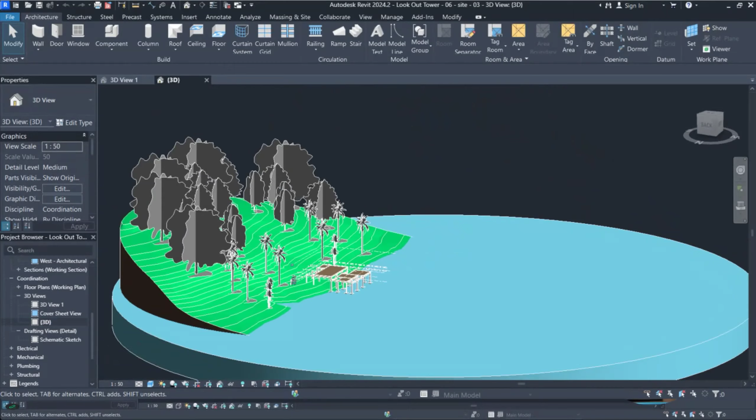In my case, it is like a lake, but it doesn't matter if it's a river or anything like that. I do have a 2-tiered foundation. I would suggest that you guys keep it simple. I tried to make this example complex, just in case anybody wanted to do it complex. Whatever you're doing should not be more complex than the one that I'm doing. Please, guys, let's keep it simple so that we can finish. So this is pretty much what you're submitting for checkpoint 2.

And the updated videos I have show how we created this, with some new features that Revit has that it didn't have at that time, and some new techniques. So I think it will be beneficial. All right, so let's check out creating the site for those of us who already have the site. And then if we have time, we'll go back to the model. Okay, so now that we have the base, we're going to create the terrain. And if we look at our original...

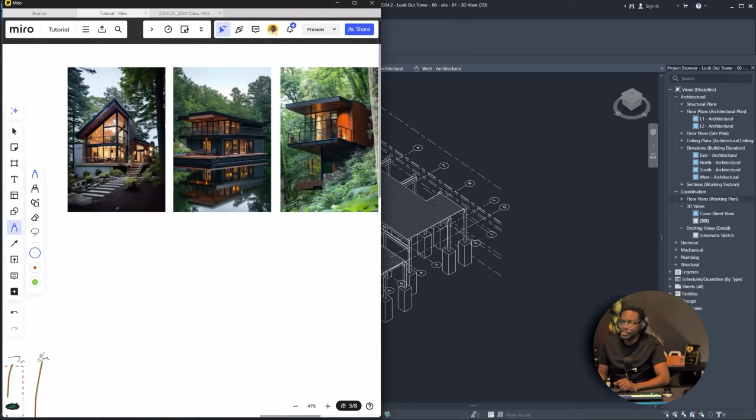So in order to create our terrain, we're going to go back to architectural, to the level 1 plan. Now to make this easier, we're going to switch. This is Revit 2024, so it has a dark mode. Because we're dealing with terrain, we're going to go to view and switch to light, because I think some of the colors will work a little bit better, right?

So the general idea, this is a section line, we're going to just put it down here. We have our land, which is something like this, and then we have these terrain lines, and it's basically sloping downwards to the water, and then we have the water that's here. That's basically what we're going to repeat here. The difference is we are going to do it a little bit more efficiently than in the sketch, but we're still going to reference our sketch.

So first thing we need to do, we need to grab the sketch that we had. That's this. I had saved it out into a file. So now I'm going to go to manage. I'm looking for links, right? Manage links. If I look on the images, I see where I have already inserted this link, right? So we did have this link here. And we're going to choose OK.

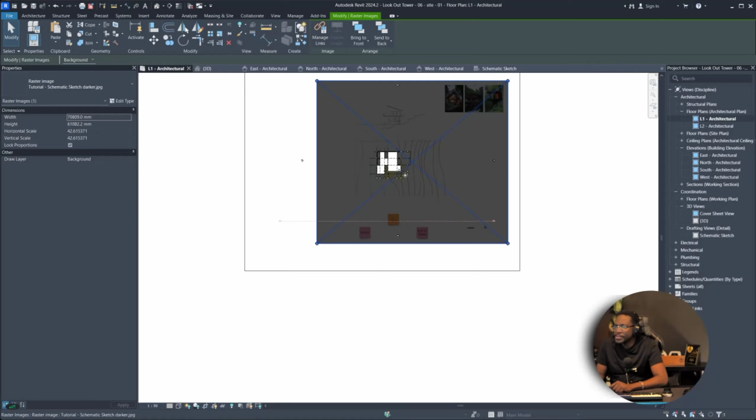We can go back to our schematic sketch. Here we had this, and we're going to copy this over to floor plan and paste it in here. Notice when we paste it, it's pretty big. We are going to make it a little smaller, and the most important thing is that we need to know what these levels are, and we also need to scale it. In our case, I don't think this drawing was to scale anyway, so we will take these contours with a grain of salt, so to speak.

So if I put it like here, it's round about there where I had the water kind of going in here, right? Now, if my contours were very specific, I could actually trace this view here. So that's what I'm going to do. I'm going to extend my page boundaries, or if I want, I can just disable it and turn it off, right?

All right, first thing, we don't want to have a square land, because that's going to affect our 3D views, because the world doesn't end right here. So what we're going to have is more of a rounded base, and make it a little bit bigger, so when we're doing 3D views, it won't look so weird. To do this, we're going to head over to Massing and Site, go to TopoSolid, and insert using a circular tool.

But before we do that, we're going to go on the right level. According to this, we wanted the land to be at around 0 here. Now, this is a sketch, so it may not have been very practical for some of the elements, but one thing that we want to keep in mind is the slope. We do have 1 meter slopes happening. So, those of you that did the terrain, right?

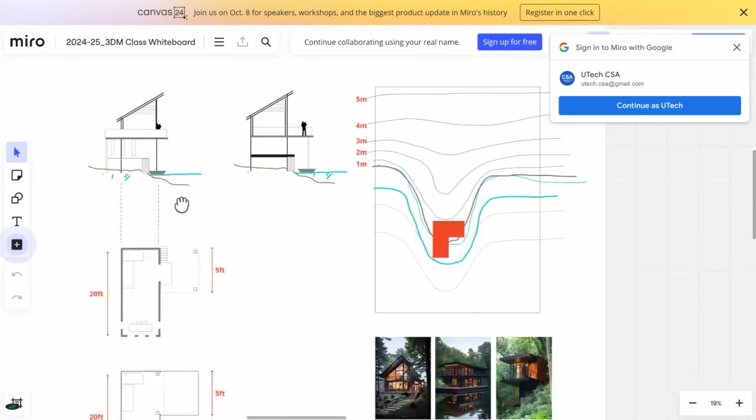What you should do now, you should have your terrain drawing. Let me go back to the website here, to the class Miro board. So if you notice, this was the initial sketch that I did. Notice that there are terrain lines and the terrain lines have numbers. This is going to be important when you're doing the site, because these are the numbers that you're going to plug into the program in order to get the slope.

All right, guys. Are you here? Yes, sir. All right. Or at least you're half here.

All right, let's proceed. So we would set our topo solid to be below the ground floor. So perhaps we will do waterline. If you remember from our original sketch, we determined that we want to have a waterline that is below the top of foundation, right? So that's what we're going to do. We have the waterline level and we want to draw the initial solid on the waterline level, the topo solid, which is the topography.

Now we're using the circle tool because we want to draw something like this, and let's see if we can move it to the center. Now we make it a little bit bigger, and we don't have these hard corners, which would look kind of weird when you render a view and it looks like the hill just ends at a weird corner. So we're not going to have that. All right, now we're going to choose OK, and then we have our base that looks like that.

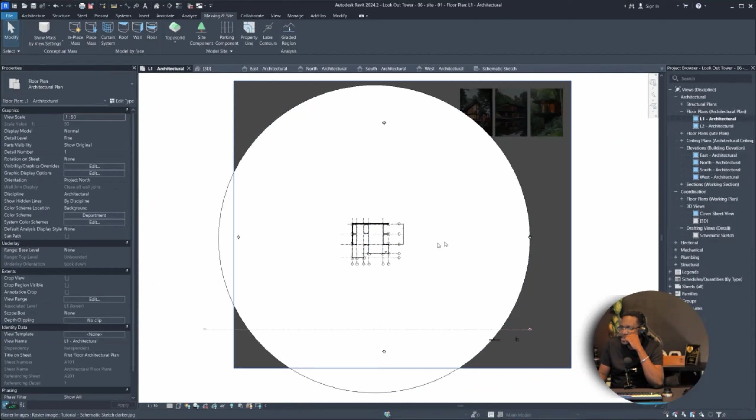Now what we need to do is insert the contour lines. It's a little tricky because we can't see the contours, but we could go to wireframe, and that will allow us to see these contour lines here. Now the general idea is that we want to trace these contour lines, but we also want to extend them to the edge of the circle. The more important thing is we want to keep the levels.

So what we need to do is click on the topo solid, and then we're going to choose add points. Now when we add points, we're simply adding a contour line to our drawing.

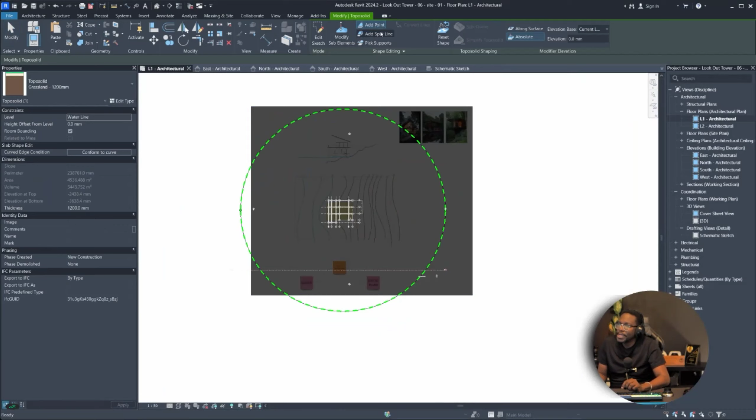So to create these contour lines, we're going to look at these levels closely and trace them based on these levels. However, we're going to extend the lines all the way to our circular boundary. To do that, we're going to go to massing and site - well, we already have the massing, so we're just going to click on it and choose add points. These points here are equivalent to the actual heights of each contour.

So what we're going to do is make sure we choose absolute, because we want the points to change height based off of a fixed location. That fixed location we're going to make the current level. So the current level, we are at waterline - it's kind of like saying this is the water level. And every level we do is going to be based on referencing that water level, so it's going to be above or below the water level.

Let me show you this. In this example here, this was the final version of my initial sketch. The idea is that I had two different levels for my ground floor, and my upper floor is just on one level. So you can kind of see where we went from this initial quick sketch to a more refined sketch here.

Now, can you guys see these lines here clearly on your screen? All of these dash lines. Yes, sir.

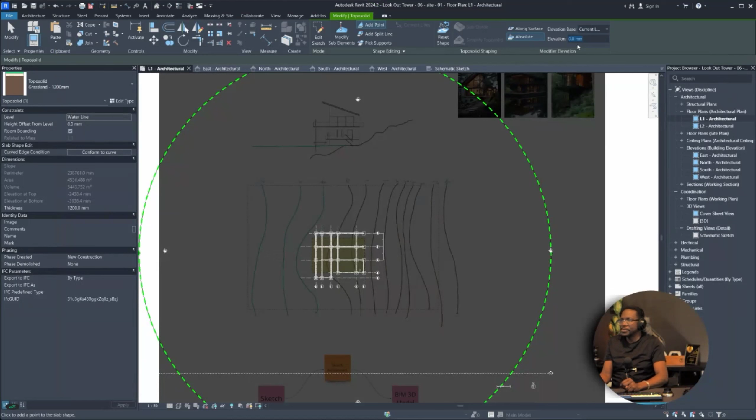All right, make sure you choose current level here, and make sure we're going to choose a different height. So the first thing we're going to choose is 1 meter, so 1,000 millimeters, and then we're going to trace this off that 1,000 millimeter line.

Now, as we trace these points here, a good rule of thumb is to try to make them as even as possible. It doesn't have to be super precise. Remember that a terrain is organic, so it's supposed to be a little messy.

Now, when it goes beyond where you have sketched, you're just going to make this up, and go all the way to the edge here. And we're going to continue this side. It doesn't matter if you stop here and then continue there. It doesn't matter. So we are going to continue this.

Oops, I think my height wasn't set, so I'm going to set that back to 1,000. Now, if you get any messages while you're drawing this, just choose OK and ignore it, because you can see these lines being generated. And if I bring up my 3D view, you can see where you're starting to get some heights, which might look a little funny now, but as we go, we'll see the difference. So I'm going to leave this view here and dock it to the right, and we're going to continue.

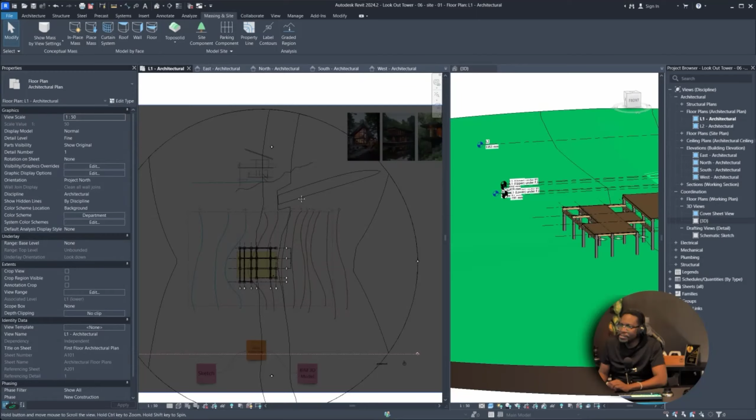So that could look good on 3D views. Exactly, because when we generate the views, it's going to look weird if your world just comes to a sharp angle and ends, right? And remember, we did have some reference views, so we want to try and get some beautiful images.

Did anybody else take any reference images or any kind of inspiration images based on their design? Anybody? Anybody? Anybody? Nobody looked up any pictures?

So, probably you guys are already advanced with the model already. But I want you to also see if you can find, just use Pinterest, Google, whatever, right? See if you can find something that is similar to what you are creating, something simple.

Like some parts of this are not simple, but some parts are. But the reason for this reference is when we come to create the rendered images, we're going to come back to these images. I didn't ask you to submit a reference image because this is something that is to your benefit. But when I started my sketch, I started from getting a reference image and then created a simple version here. As I said, these images will come back when it's time to render, to make your rendering life a bit more streamlined.

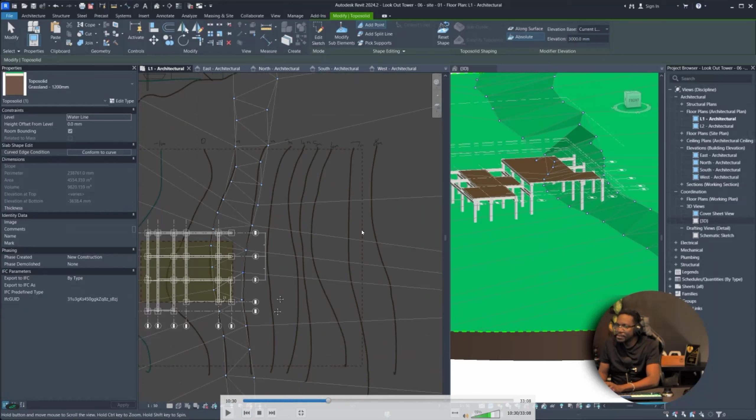And we're going to do the same thing now with 3000. So by the way, guys, I want you to keep in mind that the reason why I'm suggesting we work on this during class is, I'm telling you, when you're doing it on your own, you can't ask a video recording questions. So there will be stuff that starts to go wrong.

Like, I don't know, you're trying to draw the contour lines and it's giving you error messages and it's just not working out. There are actual things that will happen while you're creating the model. And if I'm not around, or somebody who knows the program or at least knows the section that you're doing, you're going to find that you're hitting some roadblocks.

All right, guys, so even if you're not able to do this drawing now, see if you can ask some questions that you think you'll have problems with, which will not be as potent or as viable as if you were actually working on a project.

Because I'm telling you, I don't know if you guys have ever done a tutorial. Everything in the tutorial video is fine, but when you press the exact same button, it doesn't do that for you. And that is what we want to solve while we're in class.

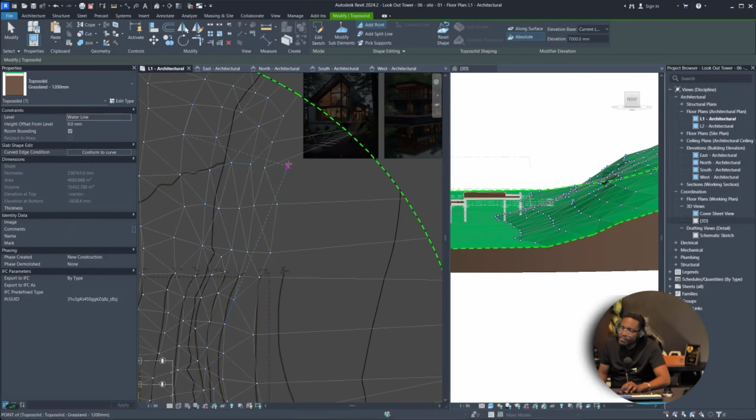Does anybody have any of your housing project? Are there any slopes, by the way, that you're doing for studio? Or is it all flat land?

Sir, we haven't started yet. The sites are flat, but we haven't started the assignment yet. We're still doing the site analysis presentations. This final presentation is a final site analysis on Friday. Yeah, I figure. But I was just wondering, so everybody has flat land basically, so no one has to really worry about terrain. Is there anybody incorporating any kind of levels in there?

Well, actually, you don't know yet because you're only dealing with... right, when I reach the design. Exactly. And if the land is flat, then chances are you don't have to worry about different levels.

So that is one of the things that we also cover in 3D modeling as well. Now, this terrain is fairly simple, so maybe you're not dealing with a terrain for this project, maybe for your next one. But this is just a feature that you need to know how to use, most definitely.

Next year in BIM, we're going to be using terrain as well when we're doing computing in BIM. So it will be kind of like a refresher, but a bit more complex than this, because this is just a simple little slope based on a sketch.

All right, now I want to show you something in just a bit. I'm going to just do another one here. Oops, yes, this is 10. Oh no, this is 1,000. So I'm gonna put 10. There we go. That always catches me. Point.

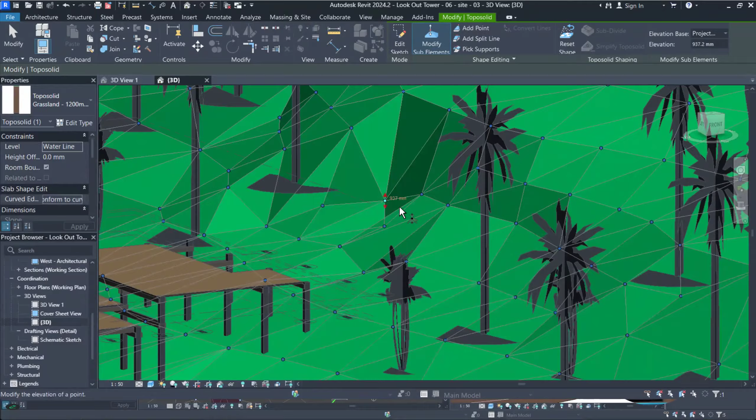So if I wanted this area here to be flat behind where the deck is, I can just go in and modify these areas like that. And I know that it looks rough, but we're gonna smooth it up before we render. So those are just some other general tips.

Some of you may have flat areas for your model. So all that means is that when you draw these contour lines, some of them will have the same elevations. But for me, each one of these dots here have a different elevation, so everything here has a higher elevation than here.

Now, guess what? You still will use the terrain tool even if you are drawing on a flat piece of land. So for example, when you finish your site analysis and then you need to do things where you show your roadway, parking, all that kind of stuff, the proper way to model is to use the terrain, the topo tool. It's just that now your topo is completely flat.

All right guys, so I don't want to see anybody using a floor slab for their studio model, right? One thing with Revit, it kind of forces you to use the right tool for the job. So if you're doing a terrain, then use a terrain tool. If you're doing a floor slab, use a floor slab. And if you're doing a roof, you do a roof.

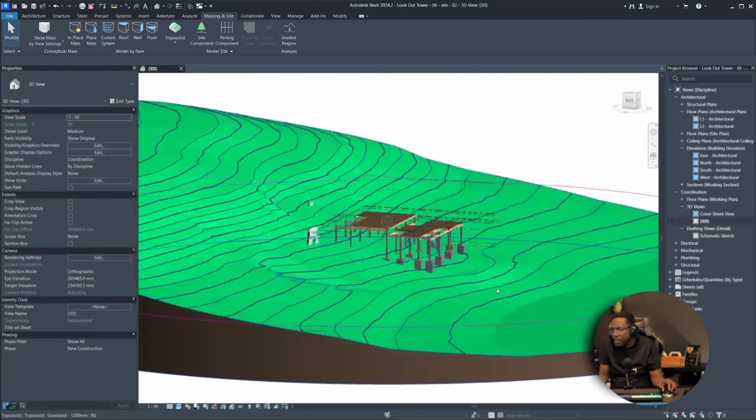Okay, so now that we have the site, we do need to add a few more elements. For reference, we are going to be adding some trees and a water body. So we're going to add the water body out here. First thing, let's add the water body.

Now to do that, we can go to our floor plan and hide this element here. If you notice, when you look at the site element, you notice that it's cut here, and the reason it's done that is because this is where our cut plane is. If we look at the side view, maybe this side would be better. You can see that we do have our level, and then we have a cut plane, so it is cutting the terrain as well. Now, that doesn't necessarily matter for us, but in terms of doing construction drawings, you would want to adjust your view range so that you're able to see the full terrain for your site plan.

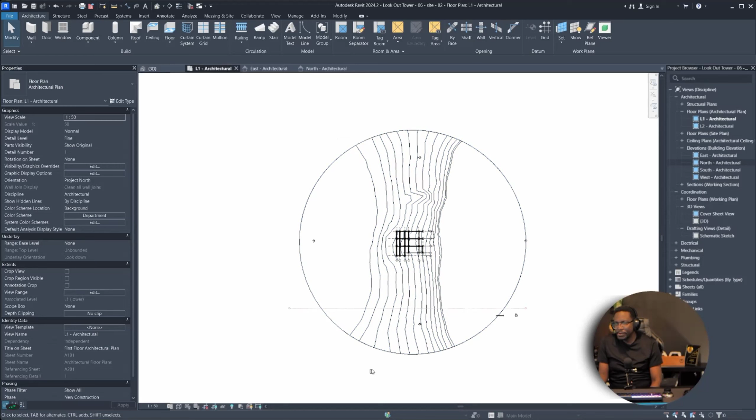So for that, we're going to go to model in place. We're going to choose model in place, and we can model under these categories. I don't think water is a category, so we're just going to choose generic model and choose OK. We're going to name this water level, we're going to call this water object or something like that, or water surface. All right, and now this is going to change up here to some modeling tools.

For example, we can extrude and do these modeling functions. For what we're going to do, we just need to do an extrusion, that's pretty straightforward, so we're going to click extrude. What I'm suggesting is the water is going to go a bit inside the terrain, but I would want the water to be a little bit wider than the terrain. So what I'm going to do is use the circle tool. I will set the levels after we draw this. Let me go and set my work plane, and I'm going to set it to be waterline. Right, so now I'm going to draw a circle.

Kind of like that. And this circle, I think I'm going to move it down, maybe like about that. So this becomes my water, because this part of the water is going to be pretty much inside the land. So this is fine. In terms of my extruded height, I can click this here. I'm going to choose OK.

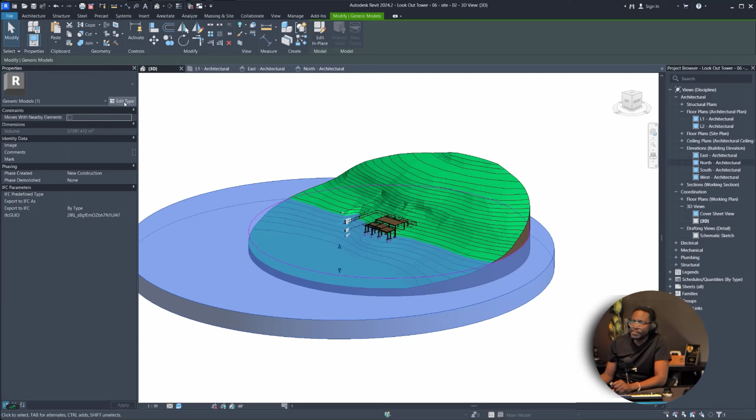Now we're inside the model. Inside the model, we can change things like the height and the shape and all of this stuff and the material. So we're going to make sure we're under modify. We're going to go here to the materials tab and we're going to find water and we're just going to click the surface here, and we could actually just click the side as well and the bottom. So this whole thing is just water. And we choose done. Then we choose OK. All right. So now we have water level that's there.

Now remember, we are going to go ahead and render these views. So we're not going to worry too much about the water material and these things. We just need it to be represented here. All right. Now the next thing we want to do is we need to add maybe some trees. To do that, we're going to need to import those families. So we need to go to insert and then load family. And we are going to look under the same US category and then we're going to look for site.

And under site, we see a few things here. No, actually not site. We're going to look for plant or planting, right? And these are actually family groups. So we can choose tropical and open that. Then when we go to architectural, that comes under the component category. So we can go to add component. And here we go. The good thing is that this is 6 feet tall, but if you click this, there are different types of tropical plants. For example, we have a hurricane palm that's 12. And all you need to do is just stick them randomly.

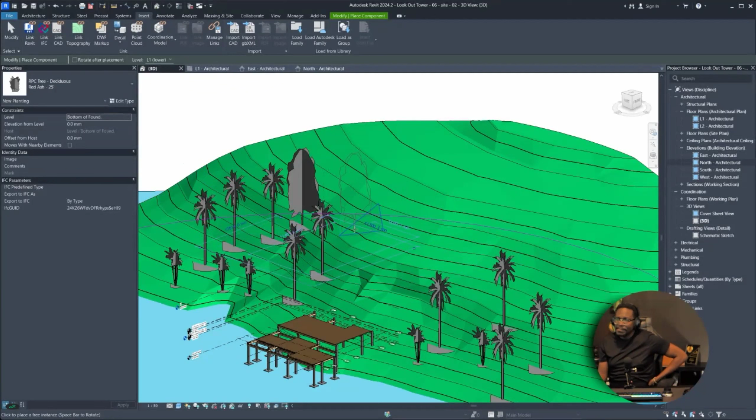Yeah. Now, you might notice that these trees look a little weird because they're like flat. And that's because it's using a type of, let's call it a tree plugin, that's called RPC trees. I'm going to just mix it up a little bit. So I'm going to choose this other one here. It looks plain in the viewport, but when it renders, it looks like an actual tree. Now, we're not too worried about that because we are not going to be rendering in Revit anyway. But we're still going to place these objects, which will make rendering in other programs much easier.

All right, so we're going to save this. And for good measure, we are going to create a new 3D view. We're going to create a camera view that will give us a perspective shot so we can kind of see how everything is looking. So we're going to go to view.

And then we're going to go under 3D view. We're going to go to camera. And how this works is you click and drag, and it's going to create a view. So I'm going to drag all the way like that and release. I'm going to set an angle.

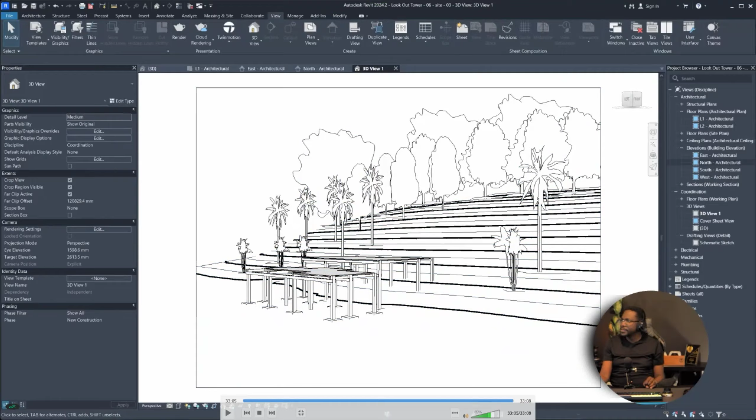All right. So the idea is, I did modify my version of the drawing. If you remember when I did this, I changed it slightly, made some adjustments, but it's pretty much the same. So I will also post that video as well in case you want, even though we've gone past that checkpoint already, but I'll still eventually post it. Because normally when I do stuff, I just record it anyway.

Okay, guys, so that is for the terrain. Now, as promised, those of you who haven't done the foundation yet, I do have some tips on how you can do that. So let's see if we can take a look on that now. Okay. All right. Now, what we're going to do is we're going to start to map out our 3D drawing. And in order to get that done, the first thing we want to consider is to structure our levels, right?

Now, for those of you who managed to look on the one that I sent last week, that last video, it's going to have some similar things. This is what the updated sketch kind of looked like. And I can show you a bigger view of that actually. Actually, it is in Revit. Here we go. And it is under schematic sketch. Right. So this was my side elevation.

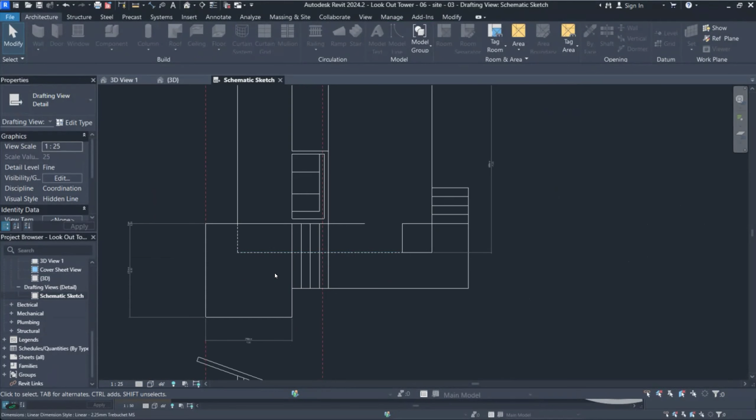So I just ended up having 2 levels. And this was my plan. So I do have 2 levels in the plan. So when you walk up here, you enter through here, and this is that kind of upper level. And then you kind of step down to this lower level here, and you can come out onto this little mini deck that is here. So I purposely made it a little bit complex, just because for those of you who may have a level in your drawing, at least you have something that you can use as a reference. But I would suggest that you keep it as simple as possible. All right. Okay, let's continue.

Usually when we're starting a 3D model, we want to get organized with our levels or our grids. So levels basically tell us what... So for example, with the drawing that we have here, this could be considered our ground level, or at least our, let's just call it lower ground level. But here we have another level, which is kind of like the upper ground level, because this entire area here is pretty much our ground floor. So these are 2 levels that exist within our ground floor actually.

So here is where we'll have our second floor or our first floor, depending on what region you're from, right? So these are all just different levels. Now, we also have a level for the water that's here. And what we can do is try to give them some labels. So I'll put W for water level. And I'm going to call this level 1A and level 1B. And then this now would be level 2.

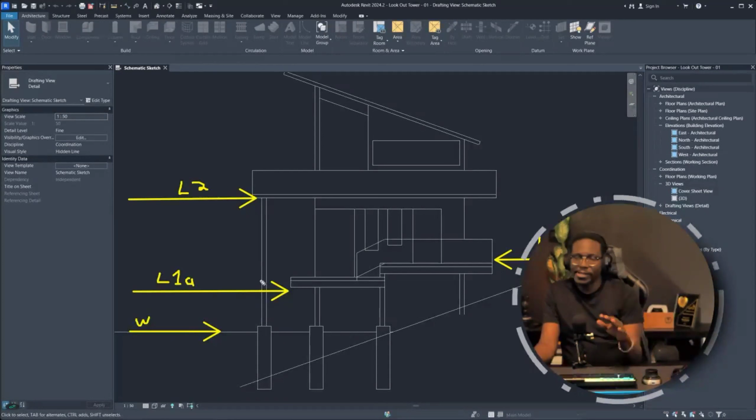So all of these are different levels, and think of them as reference points. And we're going to set up these levels first. Before we start to model anything, we're going to start to define what these levels are. Okay, let's go ahead.

Okay, now what we're going to do is, in order to determine levels, we need to be in an elevation view. So if we look over here at our project views, we're going to look for elevation, and I'm just going to pick a random elevation. Okay, so this kind of represents our elevation. And we already have two levels starting with level 1 and level 2.

Now what we're going to do is have the levels as a reference here. So I'm going to go back to our sketch that's here, and I'm going to take a snip that's there, and we're going to put that on our Miro board.

There we go. So we're going to put that here, and we're going to have our drawing here. All right, so that's our drawing here. So we're going to paste that here. All right, so now we can kind of get organized with the levels. So let's go on the east elevation view, and what I'm going to do is make these a little smaller so that we can see more of the drawing here.

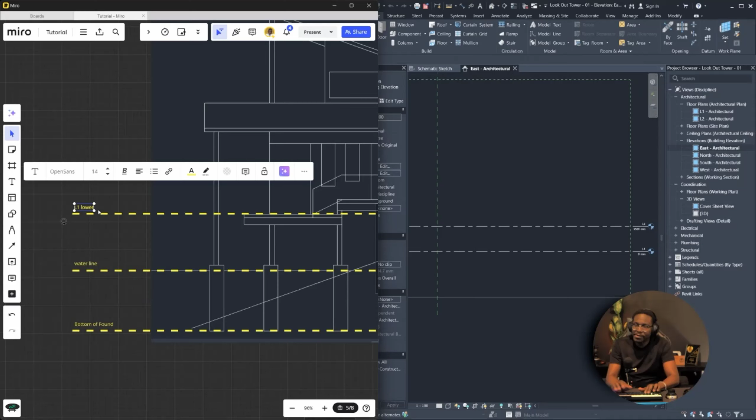Then I think we're going to have a level here, and we're going to say this is the bottom of foundation. Then we are going to have another one here, and we're going to call this level 1 lower, and we're going to have another one here, and then we're going to call this level 1 upper. So we'll have lower and we'll have upper here. So lower is this deck and the upper will be that deck.

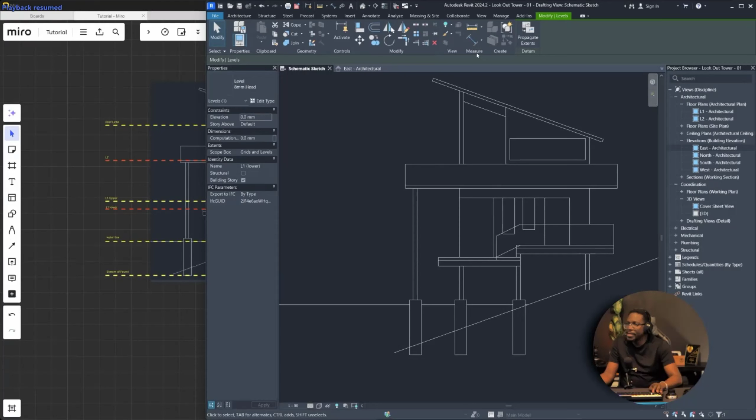All right. So that's why you see me using so many levels here, because you want to divide up your building using levels and grids as much as possible. All right, let's continue. So now remember that these heights may not be exactly accurate, but it's a good start. So for example, this is saying that it's 11.5 feet. I could maybe just round that off to 11 feet and then, when I click on level 2, I can just say let that be 11 feet, right?

So that's now 11 feet. Now, if I can take a dimension and I can put there, and there we go. So we know that that is 11 feet. Now, notice there are some other lines that you see here, right? Remember, this is an elevation view.

So firstly, we have this line here. That is our scope box. So pretty much all our annotations and everything for the drawing will be in this. Then we have this here, which is going to be our, let's just say, our boundaries. So any line or any model that exists beyond this point, we won't see it. This is just a kind of a reference line that we can use.

So we're not going to use this right now, so we're just going to remove that. And actually, if you can see here, this is a section that is here by default, and we're just going to leave that for now. All right. Now, so far, we have created these 2 levels. So this is pretty much the height of one floor that we have here. Let's create some of these other levels.

Now, keep in mind that in order to create a level, we must be on the architecture tab. That's here. And if we head over on this side under datum, we see where we have levels and grids. So if you remember, I told you earlier that usually the first thing you do when you're setting up a drawing, you're either doing levels and grids, or at least one of them, because these 2 elements form the foundation of whatever you are creating.

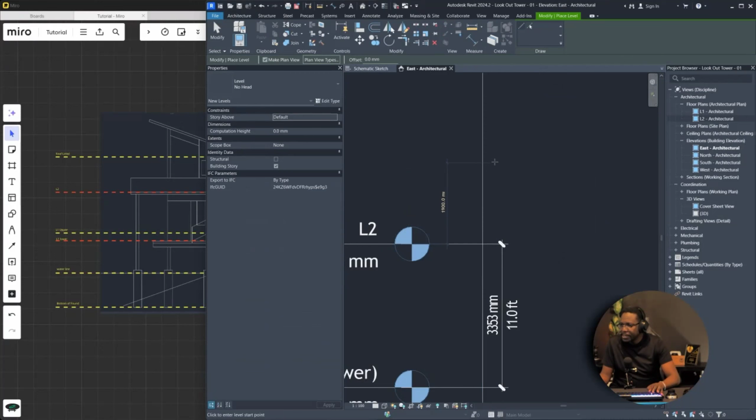So let's create a level. So if I click on level here, this is asking me if I want to save the project. So I'm just going to say, yes, I want to save. All right. So now notice I'm in an elevation view and I'm creating a level, and you can see it's asking me to start to draw a level, and a level is a line with 2 points. So for example, I can say start here and end here.

Now, when I draw this first level, notice a few things. Firstly, there is a new plan called L4, and it is attached to this level that I just drew. Now, this level is the same thing like this level here, but notice that it doesn't have this symbol at the end, right? So let's see why. When we finish drawing the level, I'm going to hit escape here. And remember how Revit works. I can click on the level and I can see the properties for that level.

So let me make this full screen for now. All right, there we go. Now these are the properties of that level, and I can go to the main properties here. And if I click on this, it will show me some different types, some different family variations for this family that's called a level. So every object in Revit is pretty much a family, and within that family you can have different variations, right? So this particular level family is one that has no head.

So I can change it to one that has an 8mm head symbol on both ends like that, or I can change it to this one that has it on one side. So this is the same family type as these other levels here, because you can see they have the head on one side and not the other side. So that is why this looks so different.

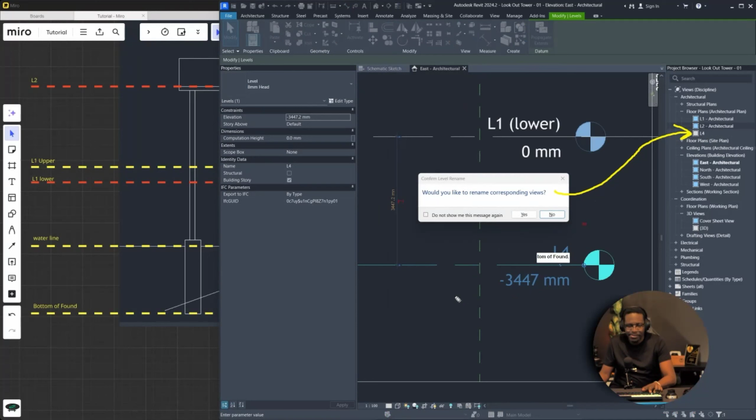So I'm going to rename this, but I'm also going to delete the bottom of foundation level, because I don't want a plan for that. All I want is a plan for my lower ground level and my upper floor plan. These other levels are just going to be references to help me model—they're not actually going to be plans.

So to avoid confusion, I'm going to change this to no head, which will help me define that these are my main two levels and these are not. Though if I do that, I'll also lose the label, but we can customize what these look like at a later time.

For right now, let's create the rest of the foundation. We also need a waterline foundation, so I'm going to click and copy this. I'll go to the ribbon, go to copy, and go to paste, and now we have our waterline.

I can always refer back to my sketch to get a rough idea of how far these are. For example, I can click here and go to my dimensions, using the little shortcut menu. I see that the top of the foundation is about 7 feet, and the top of the waterline is about 7.9 feet—I'll say it's about 8 feet.

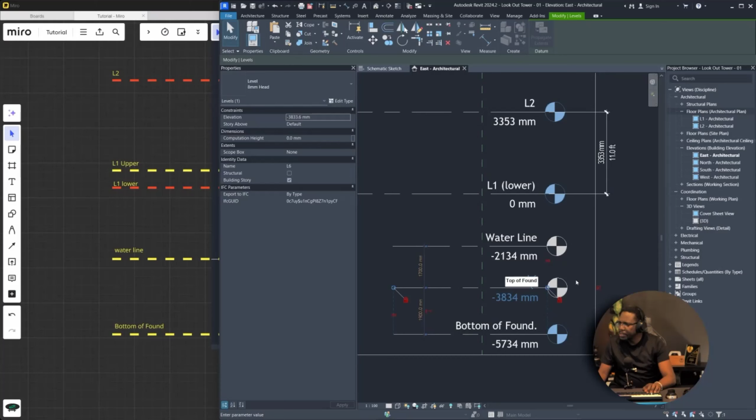So: top of foundation, bottom of foundation, and the top of the foundation was about 7 feet from the lower part here. I'm going to move this dimension up here and make this 7 feet. Now I have these two dimensions over each other.

What I can do is press tab to switch to another object whenever they're both above each other. And this one was about 8 feet—I mean, minus 8 feet.

All right, so let's make this a little neater. I'm going to grab this right at the neck here and move it so that it's somewhat in alignment. There we go. So we have our waterline, bottom of foundation, top of foundation, and our upper floor.

We also need to have our level 1 upper. So I'm going to copy this and paste it above. Oh, it's actually pasting from here, so I'll just paste it there first. Notice that when I paste it, I didn't put in the height for it.

That's because in Revit, the concept is: copy it, put it down on the sheet or in a virtual space, and then revise it. The 'rev' is revise and the 'it' is it—revise it. That's the concept of how you use Revit: you draw it, then you revise it. Just draw it on the sheet, doesn't matter if it's bigger or smaller, then you revise it.

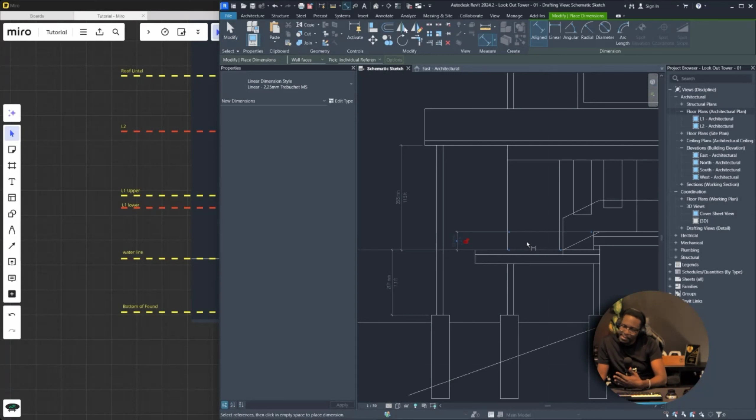But the thing is, this is to scale. So whenever we draw something, we know that we can get a measurement from it, which is why we chose to refine the sketch in a drawing environment. So this is about 2 feet, so I'm going to use that 2 feet. All right, this is that upper level.

All right, great. So now we have our different levels, right? And notice that these levels by default come aligned with this area right here. And if I move this, you'll see that some of these are attached to this line. Now this line, as I said before, is kind of a line where you put all your dimensions and annotations in or behind, so your main drawing is here and all of your annotations are behind this line, making it easier to manage. You can use it if you want, or it doesn't matter if you don't, that's fine.

So in our case, we're just going to remove it because we don't need to have that line there. There we go. And I'm going to go to move at the top, grab this at the neck here, and align it with that right there. I'm going to keep everything aligned for now. Doesn't really matter, but we just want to be neat. Okay, great, let's save.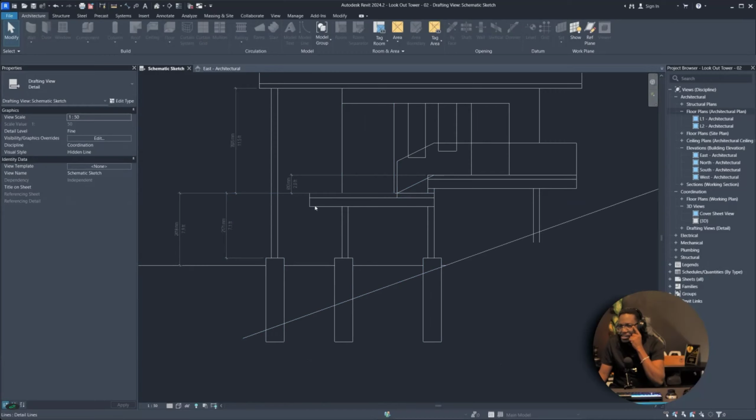Okay, now let's take a look back on our sketch here, and we need to now model these foundations that are here, right? So let's put this back here. We can always refer back to our sketch here. So firstly, let's put in these foundations. Let's get the size of our deck. So the size of this deck is the same, that's actually this element right here. And remember, we might come up with some adjustments to our drawing as we go along.

So in this drawing here, I'm going to go to annotate, and go to detail line. And I'm just going to put these reference lines like here and like here. I'm going to select them, right click, and turn them into a hidden line, so it's going to be dashed, and I'm going to override the graphics of these elements and make it red. There we go, so I can use it as a kind of guideline.

All right, great. So this element here is going to be this lower deck, and this lower deck has this kind of shape like this. Now, the great thing about this is that I can just grab, and I'm going to copy this, and go to my level 1 lower, right? This is the L1 lower. And we can keep track of these levels. Remember, we said level 1 lower will be our main level that we'll have our floor plan on, which is going to be here. So at our level 1 lower, that's here, it's this.

We don't need this reference line, we can delete it for now. And we're going to go to modify, then go to paste, align to selected view. Actually, it's not going to be aligned, but we can just go to paste. And when we paste it there, notice that we have our drawing. Now, this is from our schematic sketch now in our floor plan. So we're going to paste it there, and say okay to finish.

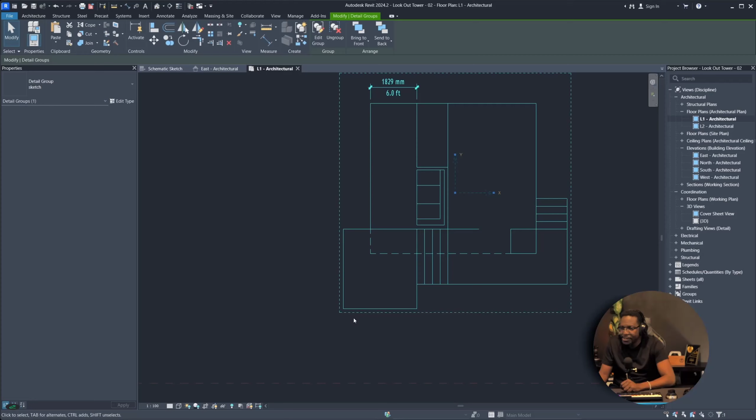So for those of you just coming in, what we're doing is we already looked at foundation on creating the terrain. So now we're backtracking a little bit to look at creating the foundations, because we didn't get to do that last class. I did give you guys a video, but I'm doing something that's a bit more updated. So notice in this video, we actually carry our sketch that we did in Revit in our drafting view, and we paste it on our actual floor plan level so that we can reference some of the dimensions more easily.

All right, so let's continue. So now, firstly, our base is a slab, so we need to draw a slab.

So we're going to go to architecture and then floor. Once we go to the floor tool, notice we have some tools here, so we can draw a line and start to trace out our slab. I'm going to show you two different ways. First, I'll trace out this base, this is my lower base. When I'm finished, I'll tick to confirm, and it shows us a 3D view of our base.

Now we can track what we're doing by going to the 3D view. If I head back over here, we'll see we have our 3D views under coordination right here, so we can double click that. Now we can see the first part of our deck, which is pretty cool. We can dock this so we have our floor plan and our 3D view at the same time. If I click on this, it will highlight over here, which is super useful.

Now, this is just a key pointer over here. You'll also notice these squares, and some are blue and some are gray. The ones that are blue are currently on a sheet. So if you have a sheet, you can have multiple drawing views on it, and the ones on a sheet are colored blue. That's just why some of them are gray and some are blue, just as an FYI.

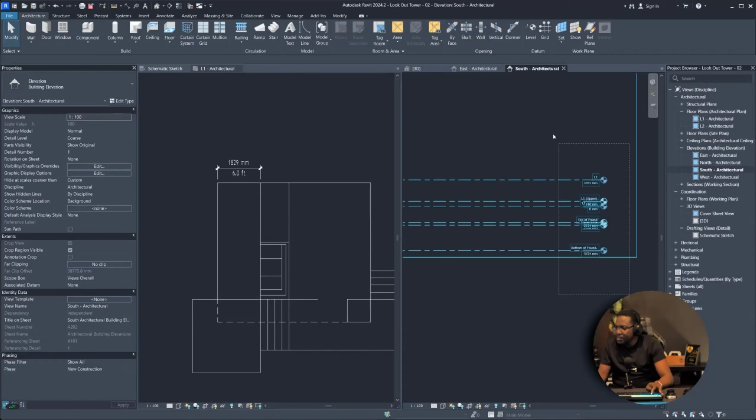We're going to close these others here. Let's bring these in a little closer, and I'm going to use my move tool to move them in closer, so it's nearer to our object here. Also, let's change this back, we're going to make this about 1 in 25, so now we can keep track of where our levels are. There's a shortcut, MV, for move. So if I hit MV, I can move. Let's move these a little closer so we can keep track of where we are.

All right, so we've drawn this part here. Now we need to draw this upper deck that's going to be here, and then there's this ramp in between. To draw this upper deck, I'll go back to architecture and then floor, but this time, before I start drawing, I'll say this one should be on my level 1 upper, because that's the level it should be on. I could use the boundary line tool again, but this time I'm going to use one of the greatest features in Revit ever.

And that is the pick line tool. I'll click that and pick a line, and it will just use that line as the boundary, this makes life so much easier. So I'm going to pick line and pick. Now, notice when I'm picking, some of them aren't exactly lining up, like this should go like this and like this, but guess what, it doesn't matter. So now I'm going to use the trim extend tool, and trim that to there, trim this to there, trim that to there, and trim that to there, and voila, you have your slab.

Then choose OK, and notice now I have a slab that is here and one that is here.

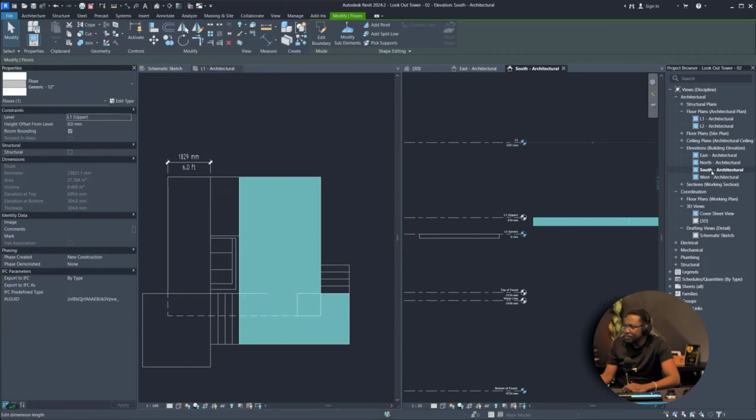Right, so we do have our drawing here that we're going to use as reference. Actually, this should be the north view. Let's see, actually, so right. If we take a look at this now, this here is our lower deck, that's here, and this here is our upper deck, that's here. So you can see we're starting to create our base.

All right, let's proceed. We're going to do the same thing here. We're going to click on this deck here, and we're going to make it 150 millimeters. All right, the space in between these should have the ramp that is here.

Let's move these levels down a little more now. I'm going to use the move tool and move them to about here, so we can clearly see where we're at. All right, now something else, this here is also flat, so as a part of our deck, it should come up to this point. So what we're going to do is modify the boundaries of this floor slab.

With it selected, we're going to go to edit boundary, the top, and we're simply going to add a rectangle, and draw it here, because this should be a part of our boundary. Now notice that we get this error here because it's telling us that there are lines that overlapped, and it's going to show us that line, which is highlighted in yellow. So the line should have gone like this, right? So, you know, that is Revit for you, it's going to help you to draw actually.

So I'm going to click this line here, and I'm going to delete it. And for this line, I'm going to just drag it down, and I will just snap it there. It should be fine. Now also notice that these lines have thicknesses to them. If you don't want to show them, you can click on this button here, and then everything will be thin lines, but we're going to leave it on thick for now because it's visually helping us. We're going to choose OK.

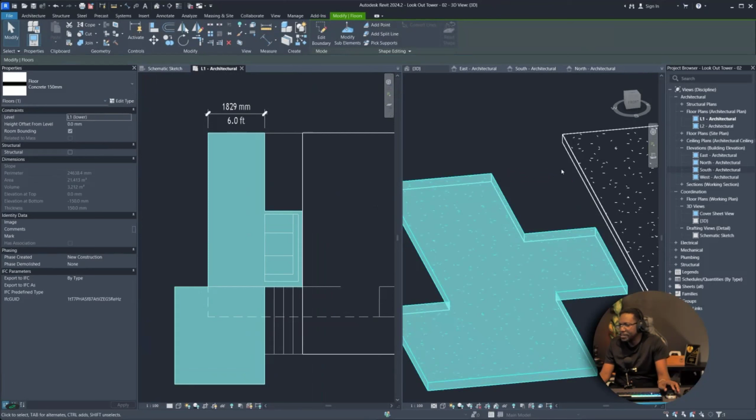So this space here is where we'd have the ramp. That's going to be actually a pretty steep ramp, so we're probably going to have to change that into a step, I think, we'll see. All right, then we have this, we have our upper level that is here as well, and then we have some stairs here that we need to draw.

Now, before we go any further, let us deal with the foundation first. According to our sketch, if I look back on my schematic sketch, we do have these foundation stilts to draw, and then we have these concrete stilts that are in the ground. So we're going to draw these now.

If we look back at how we did this, the plan was that we actually had another level that's here, and we call this top of foundation. So let's put that there, we call this top of foundation. So we're going to have a box, and it's going to go from the bottom of foundation to the top of foundation. We can actually try and do that in the 3D view, right?

Now, if you notice in the 3D view, you see it gives you all of your levels in one space. So we can actually even delete this because we don't need the scope box, just to make it neater. So I can select these levels that's here, all of these levels, and I'm going to move them and make it a little bigger.

So what I'm doing is I'm actually moving my levels to the area of my drawing, which just makes it a little bit visually easier to understand. So I'm actually just doing this. Now we can align these a bit later, so it doesn't matter if it's not 100% aligned. That's fine, don't worry about it. But right now, we just want to align these.

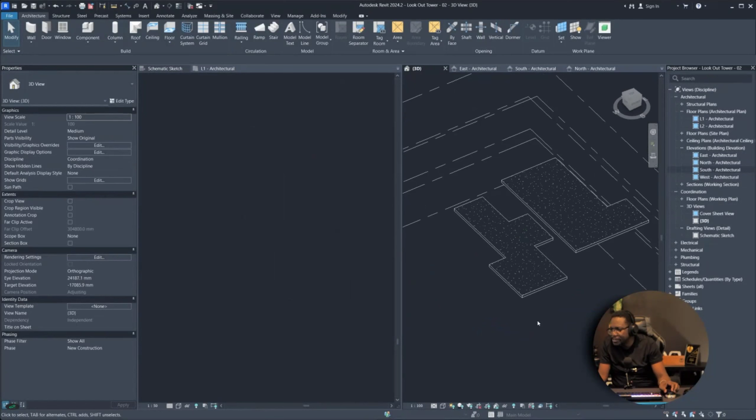So now we're going to deal with the foundation that's below. Now, to do this easily, we're going to go to our plan view, and we didn't really sketch where the foundations would be. This is our sketch here. Let's not get it mixed up. So this is a group, so we can go into the group, and I can select everything here, and I'm going to only select the lines. I'm going to deselect this, and I'm going to override all of these lines.

So I'm going to right click and go to override by element, and I'm going to make these maybe gray or orange or something that's a different color, so I know that these are my sketch drawings. And then within that, I have my 3D drawings. Right, now we need to have an idea of where these foundations are, and this is something we didn't determine in the sketch, and that's okay. So we're going to determine that now.

So this is where we're going to need our grids, because our grids are going to help us to align these foundations. Now to use grids, we have to use them in a plan view. So for right now, I'm going to make this side a little smaller because we care more about this side. So I'm going to grab my grids, and remember the concept of revise it. So I'm just going to draw a grid where I think it should be. I'm not measuring it now, I'm just drawing it.

And from this very rough sketch, I'm pretty much saying that where these intersect, there will be a column there, a foundation, right? But I don't know yet. I'm just drawing first, and then I will make it up fully later. So I'm drawing this here because I think I'm going to have one here and one here. And this is two levels, so I probably need to have one on this side as well. All right, so now I've kind of drawn them in.

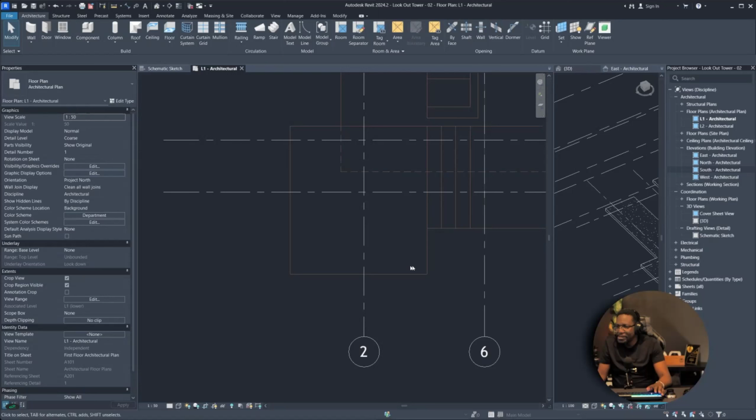Now for this, I want to have a grid here. Now I'm probably going to keep the column grid going along the edge here. So I'm going to move this here. And another way I could do this, I can use the align tool. So instead of moving it and snapping it here, I can go to align, and I can click the edge, then click the line, and it will just snap to that. And if I wanted to, I could actually lock it, but I'm not going to lock it, or constrain it would be the proper term.

All right, but I want this to offset at least maybe, because I think these are going to be, actually, now I'm even wondering what's the best way to do these. I think the columns are going to be right on the edge of here. And this is where we come to our foundation drawings. If we look back at some notes that we have here, we can get an idea of what is the structural arrangement of some typical foundations that are used. So these are some typical joints that are used in foundation and in stilt foundation.

So we can choose, okay, how do we expect this to work? Like, okay, this is how it could be mounted to the base, but here, are we going to use something like this, where we have 2 members like this, 2 members like this, and then the board sits between it? We could use this arrangement. So let's try and work with this arrangement. So if we're going to use this arrangement, then these columns would actually be a little bit outside the base, right? And we're going to assume that this is maybe a 4x4.

Let's make it a bit thicker. Let's say it's a 6" by 6", right? Just for our purposes. So in that case, that would put that column here. So we can click on this and I'm going to go to my move tool, and if it's 6 inches, this is going to be 3 inches. So it's 3 inches that way. So one of my columns would be here and one would be here, right? Actually, no, it would be 6 inches, because this is to the center of the column.

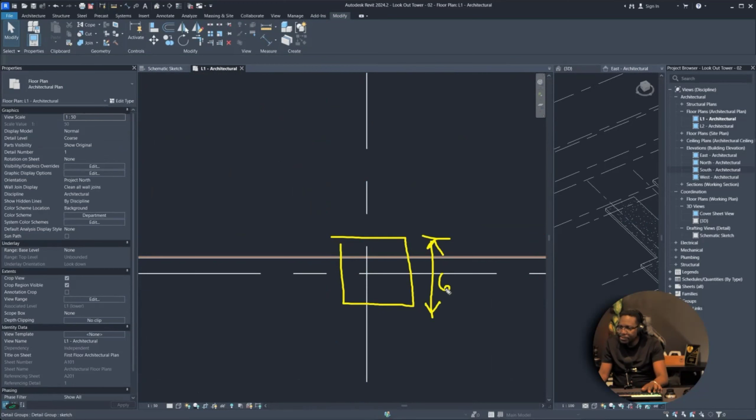So for example, my column would sit kind of like that, and this would measure 6 inches, but this actually should be on the edge of the, so this is my base. So this actually sits on the outside of the base, and then you would have the wood members sitting kind of like this. Forgive this horrible sketch, I'm using the mouse. And then we'd have another member that sits here like that, right? And then you have the rest of the boards that sit like this. And that is how this particular detail would work, right?

So if that's the case, then this should be 6 inches off of the edge of that. So we are going to adjust that. So we're going to make this 6. So we're going to type MV to move and move this 3 inches again. There we go. So if we use our dimension tool and check it, yeah, there we go. And we can actually move this like here. So this is about 6 inches off the edge there. All right. So we're going to have one column here and we're going to choose how to do this. I think we need to have the next one. So we're going to move this down here and then we're going to offset this 6 inches like that.

So just so that we can get an idea of what's happening, we can actually go to annotate and use the detail line. And I can draw this box here and I can make it just, there we go, 6 inches and this 6 inches. And I'm just going to group it together. I'm going to call it temp column because it's just temporary. All right. So I'm going to just move that here just for now. All right. So this is where it would be.

And actually, I think that it should be up here. So yeah, I was actually right first time. I should have this here. Sometimes it's so good to visually see how something works. So this should be 3 inches. Yeah. Because this is where the column would be, and then it would be supported this way, and this would now travel all the way over here, and then you'd have a next column on the outer edges there. As for the edge here, oh, this is actually the edge here.

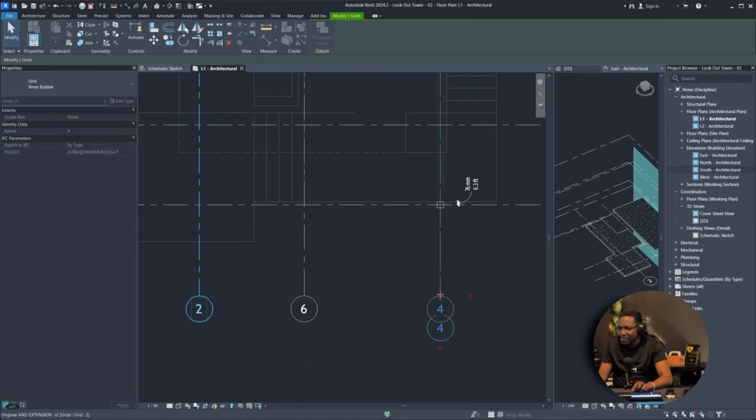Let me move this up a little bit. All right. And then we're going to have one here. So this is already kind of done for us. We're going to adjust this to the edge of that. Then the next one, I think we need to have one at this edge here. And I'm just doing this based on common sense, so I am not a structural engineer, but we can use common sense to say, hey, I think we're going to need a column at the end here, column at the end here, just because of what we're doing.

Yeah. So we want this column to land, I think, over here. So we're going to offset this. So we're going to go move. We're going to move this 3 inches. And then I'm going to actually copy. Now, the next thing is we need to kind of organize these because they're all over the place. 7, 2, 6, 4. And so usually we put letters on one side and numbers on another side, so we can refer to column A4 or B6, but we revise it. Remember that method. So we draw it and we revise it.

So we're going to continue. All right, so this one here, we're going to move, and we're going to offset this by 3 inches. And yeah, so let's see. So we're going to have a column here. So we need to have another grid. So I'm going to copy this grid. I'm going to put this grid here. And then I'm going to go to move. I'm going to make this 6 inches before. No, I mean 3 inches. All right, there we go. So we're going to have this here.

So we're going to have a column here, and then we're going to have another column here. And we're not going to have one here, actually. So this grid, I mean, it goes all the way through, but just so that we can visually recognize, I'm going to unlock this and move this to here because we're just going to have a column here, here, and here, right? So just for visual, I'm going to put it like that.

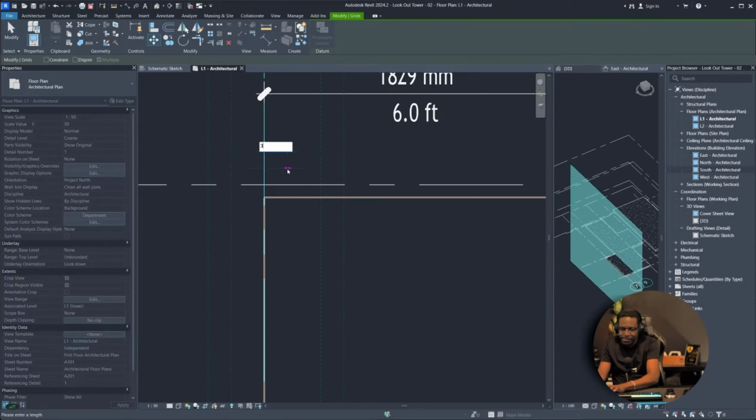All right. So now our grid is complete, right? And remember, we said we are trying to use this method for setting out our columns. So these are columns here. That's pretty much on the edge. And then we're going to have these guys like that. All right. Now it's time to draw columns. So we're going to delete this because this was just a temporary column.

Now to create a column, we're actually going to model it. Now, there's a couple ways we can do that. We can go to architecture and we can go to column. And notice we have architectural column and we have structural column. So as it says, structural is for load bearing, and architectural is a way that we can put columns into our drawings and not have to worry about inputting other structural details. So it's kind of just a visual representation of where columns should go. So that's exactly what we need. So I'm going to do this here.

Now, if I click columns and I just plot this column here, then by default, if I look at that in our 3D view, this is what that column looks like. You can see that's that column there, which is not exactly what we want. But as we said, draw it, then revise it. So if I click on this column here, notice it highlights in our plan and in our 3D view. And then this is the drawing here.

It is a rectangular column. This is a family. Now we can click on this and there are some other dimensions here, but in this case, they don't have what we need. We need a 6x6 column. So in this case, what we're going to do is we're just going to go to edit because we want to edit this existing family and create our own.

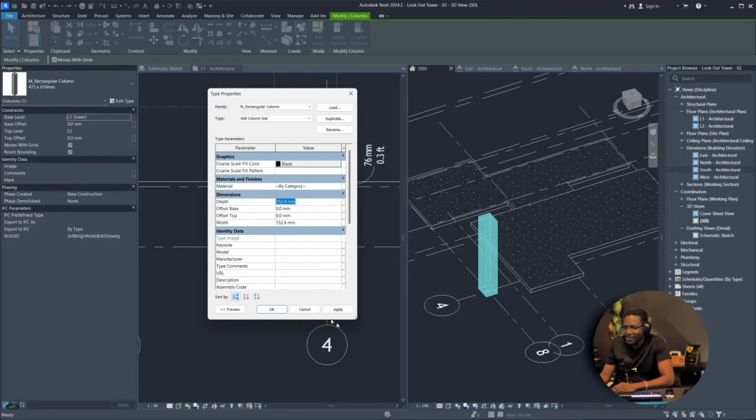Okay, so we're going to choose okay. All right, so now we have this new family. So if I click it, actually wait, I'm going to change it to stilt 6x6. Right, so here it is, M rectangular column, but the subfamily is going to be stilt column 6x6, and that's what this is, and that's great.

Now we can mass copy these. So I'm going to go to move. Yes, we need to save. Thank you for reminding me. And I'm actually saving progressively. So I'm going to go to save as, and this one is going to be 03. All right. So let's continue.

So we're going to click on this and then I'm going to go to move and then grab it at the center here. And I'm going to stick it right here. All right. So I'm going to go to move again. Actually, no, I'm going to go to copy. That's CO, that's the shortcut. And I'm going to say copy multiple. Make sure this is clicked because now we're going to distribute it.

Now there is a way to automatically distribute it where these grids meet, but because it's so irregular, we're just going to manually copy them in. This one is a little funny here. Okay, but we'll come back to that.

All right. Now I realize, guys, that the time is almost done, but what I wanted to show you is that pretty much once you have the grid down, we can now put the columns at each one of the grids. Do you guys notice that? For those of you who are still with us? Yes, sir. Right. I feel like going forward, we can just finish it up.

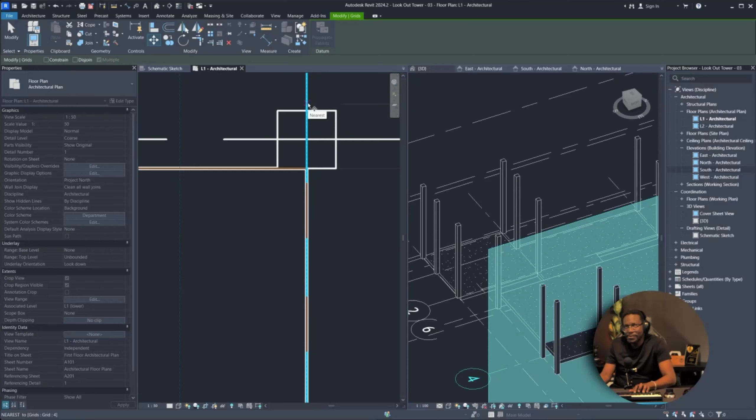Right. So what I'm gonna do is when I finish saving this class, I'll put it on so that you can watch the rest of it and so you can follow. I'm not gonna do stairs today because it's just the site, and as you realize, we could cover the site in like half an hour.

So the main thing is for you guys to finish the foundation. I assume that most of your foundations are a little bit less complex than mine. So you should be fine. You should definitely be fine. All right. So I will save this and put it so that you guys will be able to watch it. All right. That would be for the recording of this class.

All right. Now, one thing I would say, guys, is that if we're gonna keep on track, you absolutely must complete these 2 checkpoints because you can't start checkpoint 3 unless you finish 1 and 2, because you have to put the walls on something. They can't just exist in thin air.

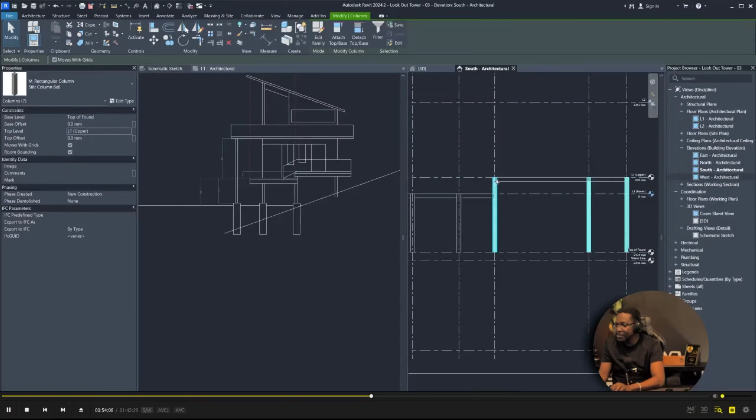I'm going to make sure I grab it in the center and snap it there. So now it's snapped 100%. Let's turn the thin lines back on. There we go. You want to make sure these are always 100% accurate, because everything else we build from here on is going to be based on these dimensions.

Okay, so now we have our grids. Let's make it a little neat. There we go. Also let's align this one here. Good. So we're going to use letters on this side, so I'm going to click on this and say A, B, C.

If I had drawn the grids in the order they should be drawn, I wouldn't have to worry about this. I think I should have gone the other way, but it doesn't matter. 1, 2, 3 - this is telling me I already have a grid line called 2 or 3, which is here. So 2, 3, 4 - yeah, I have 4 already. 5, 6, 7 - okay so this is 6 and 5, 4. I have 4 already, okay so 1. Yeah right, I do have 4. 2, 3, 4, 5, 6. All right, great, that's saved.

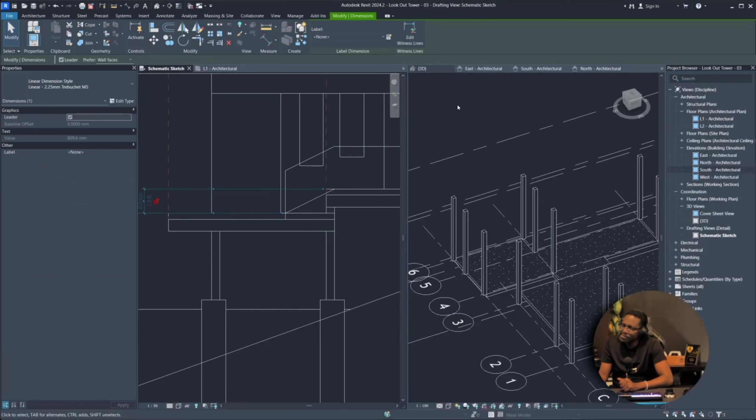Okay, let's continue. Right away we need to have these stilts going from level 1 down to, we want to have top of foundation, right? So I'm going to click on these along the edges, the ones on level 1. Remember, level 1 is this lower level here. I think I need to align these properly because they're visually bothering me.

So yeah, let's align these properly. Let's click on this and align this here, and align this there, and align this here. Let's just be organized about this. Yeah, let's go here. We've got to change the scale on this, so we're going to go to the scale here and make it 25 - oops, this scale actually, make it 1 in 25. There we go, all right, now let's align these.

All right, lovely, let's continue. Let's go to the south, make sure all these are aligned. Yeah, good, good, good. And go to the west - ooh, west needs to be aligned as well. So we're going to put this to 5 and align these. All right, so I think we're all aligned now.

So if I close some of these views, I think south is the one we're going to use mainly. Right, so now these are all aligned, which is good. Let's also change the scale of this one to maybe 150, so now we can concentrate. Also notice that when we're on the elevation view, it shows our grids and our levels. So this drawing is very organized, which is great.

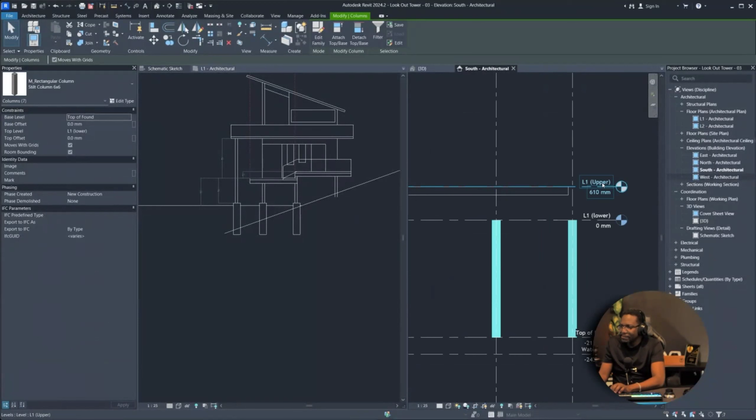So now all the columns are lined up here and to here. Now, of course, we're going to select all of these. We want these to come to the upper level one, which is this level here. So we're going to say, let the top level of these columns go to the level one upper. There we go. This is why we have these grids, because it just makes the modeling process so much easier.

All right, so let's take a look at that in 3D. You can see that we now are beginning to have our base nicely aligned. Okay, so now we also want to put in our structural members, because if we look back at our sketch here, we need to have these members running along the edge here.

So we're going to run some along the edge here, going across. Now to run these structural members, we need to model them, of course. And in order to model them, we're going to go to structure.

In Revit, you want to always use the proper type of family for whatever you're modeling. So for example, if you're drawing a structural framing, you don't want to use a column, because a column is meant to go vertically.

And in Revit, you want to use the correct category to draw the correct objects, because remember, Revit is a collaboration software. So for example, you might have a structural engineer, and that structural engineer is expecting beams to be actual beams, meaning they're supposed to be horizontal, and columns supposed to be vertical. And if in your drawing you're using beams as columns, then it's going to pose a problem for the structural engineer's drawing. But even before you get to that, it's just not tidy.

And that's the thing. Revit promotes you to be very tidy, very organized about how you go about your BIM model. So for example, a floor slab is different from a roof slab, even though both of them are horizontal, right? So if we're going to create these members, these are not columns, so we're not going to create columns and rotate them. Instead, we're going to create structural framing.

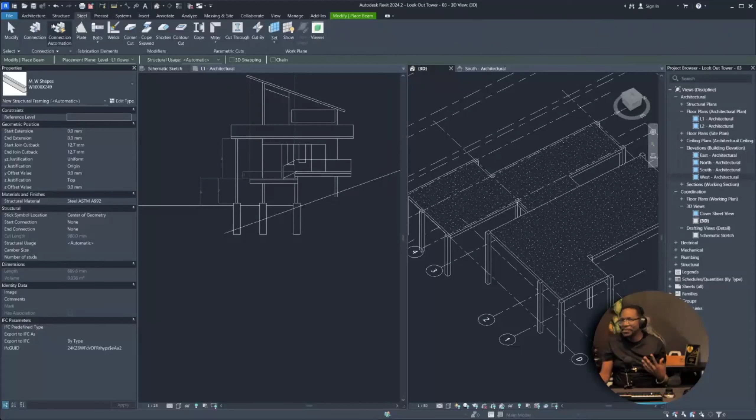However, it doesn't mean that if you're doing the architectural part of Revit, you don't go over to the structural part a little bit to get some stuff, or you don't go over to the steel part. Chances are you're not going to be in the structural tab a lot, because we have things to do like rebars and all sorts of things that are heavily structural based, right?

However, for things like columns, beams, floors, truss systems, some of these we might actually dabble in for architecture. And the same way, if I was an engineer, I would pretty much live in structure and steel and precast and systems perhaps, it doesn't mean that I may not want to use a tool that's only available in the architecture tab, which has like windows and doors and roofs and that kind of stuff. So just keep that in mind.

Though I wouldn't try to dive too much into the other industries, because for our type of drawings that's in architecture, we want to keep it about the building as a whole and not too much on the details of structural engineering and plumbing, because there are professions for those areas. So I'm going to go to structure, but I'm just visiting, right?

And in this case, I'm going to need a beam, because in our sketch, these are beams. So I'm going to choose beam. And before I actually start to draw a beam, because right now, if I draw a beam, I'm going to be drawing this type of beam, which is an I-beam. So let me just draw it right there. That is what I'm going to be drawing.

This is not the type of beam that I would like, so I'm going to delete that. I would want a timber beam. So let me click beam. Now I could click this drop down, and these are the different beams that you will notice are there.

And most of these are actually steel beams. Now, in this case, and like in many other cases, you're going to need to import a whole new family to be able to have in your project, because right now the default is going to be I-beams.

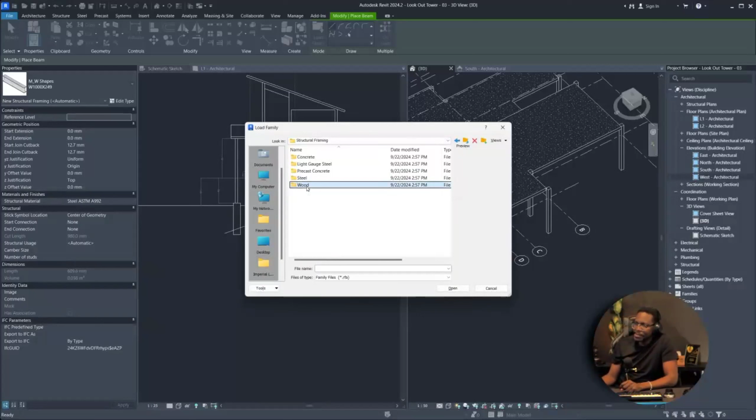So in this case, these are all the categories of families, and I want to go down to structural members. That's here. I'm going to go under structural framing, because these are the categories that beams would fall under. I'm going to go to structural framing, and then to wood framing actually, because that's what I want. Then I have a couple options here — in this case, I'm going to choose dimension lumber and choose OK.

In this case, it is giving us the imperial name 2x4. These are terms that we use if we go to the hardware store and say, hey, we need a 2x2 or a 4x4, but it also gives us the sizes in millimeters as well. So in this case we can pick — I'm going to say these are maybe 2x6, perhaps. So I'm going to choose that category and choose OK, and now I have a 2x6 length of lumber. So if I draw, that's a 2x6 length. Pretty cool. So, all right, I'm going to delete that.

And I'm actually going to go to my plan view here, and I'm going to draw the lumber in this plan view. So to do that, I'm going to click on beam again. Before I actually start to draw, I want to figure out how to offset my justification.

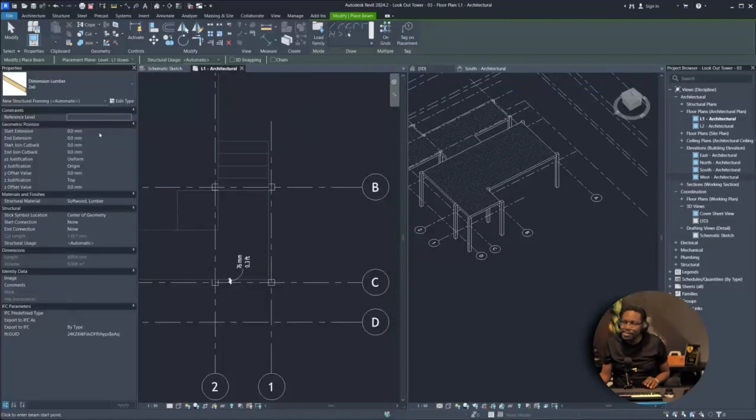So to do that, we're going to say, okay, we want this beam to be on — if we take a look here, these are the members that will run horizontally like this. So we want these members to actually be on the level 1 level. So we're going to say the reference level is going to be level 1 lower for the beams running down here. Well, actually, I need to put some columns in. Oh, these columns are actually in, but we're not seeing them here. So okay, let's fix that before we draw the beams in.

So I'm going to press escape, because if you notice, you're not seeing the columns here on these lower levels. And the reason for that is we need to adjust our view range so that we can see things that are below our cut plane, right?

So for example, if I go to my east elevation here, I'll just go to a shaded view so you can see it a little clearer. There we go, so this is our column here. Let's go to the north and let's go to shaded. Let's go to consistent colors. It's fine, let's go to shaded. All right cool, now this is our base here, but this is our cut plane.

Let's make this a little bigger. So currently, this is our cut plane here, and I'm going to put that in this color. Everything above the cut plane is up here, and everything below the cut plane is down here. So as the setting is in Revit now, we can see everything above the cut plane, which is why we're seeing these in plan, but we're not seeing what is below the cut plane, which is these. So we need to change that setting.

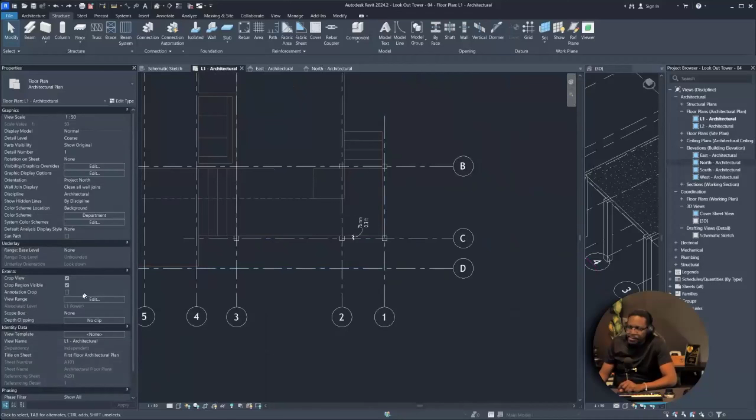So to do that, we need to go to our plan view, and we need to go to our view range. To access your view range, make sure that you are on the sheet, meaning that you haven't clicked an object. You've clicked the sheet, or you've clicked nothing, and then you will see the properties of your view, your floor plan. So you scroll down here, you look for view range, and you go to edit.

Now, the important thing to understand about view range, it can be a little confusing. If you go to show, they have this very handy diagram that is here. What this is actually saying is that this is your entire view range, from here to here. This is the stuff that you would see, and this is your cut plane that is here. So when you have a cut plane here, you can see up to this point here or down to this point here. So this is why, if you don't cut through the furniture, you're going to actually see the chair and the table and everything up to this point.

Now, in order to see below this point, we have to adjust what's called our view depth. Our view depth is this area here, whereas our primary view range is really this area up here. So these are the two things to remember.

So these settings, for example, your cut plane is going to be this - how far up do you see? Like for things like reflected ceiling plans and all of that, it will be up to this point here, meaning your offset. So you're going to be on level 1, looking up to a maximum distance of this, and looking down to a maximum distance of this. So there's no offset, you're looking down on the 0 line. Whereas your cut plane is offset at that, which is here.

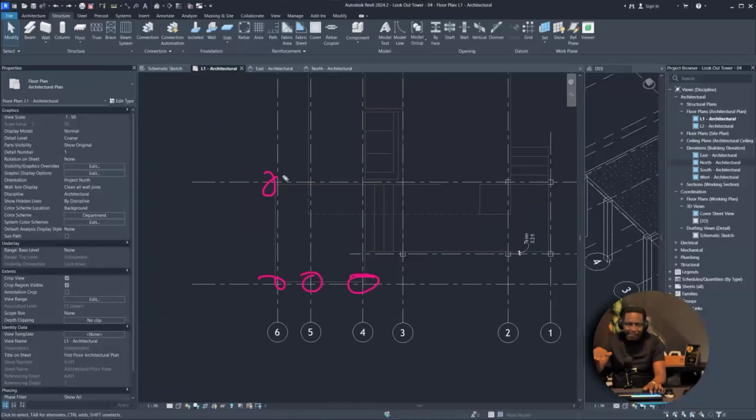So this value here is the answer to why we're not seeing the columns on the ground floor. If we take a look here, I'm going to cancel this. We should be seeing some columns here, but we're not seeing them because they are below our level. So what we need to do is go into view range, and let's have this up for reference. So what that means is that our view depth, which is this section, is how far do we want to see beyond the level that we set. Right now it's on the same level and its offset is 0, which means that pretty much anything below this line we're not going to see.

So what we could actually do to fix that is set our view depth to be the level below. So now we will always see up to the level below, and then we're going to say apply, and look, now we're actually seeing the columns. So this is what we need in order to draw our beams.

So we're going to go to beams. Right now, notice that if we try to draw the beam now, let's draw the beam like this. So there's a couple of things - firstly, let's draw the beam. When we draw the beam, we're not seeing the beam, but of course the beams are there. We can actually see them here.

Okay, so if we go to beam and we attempt to draw the beam now, you might notice that we don't see it in plan, but we do see it in the 3D view. Here is that beam here. Now, again, this has to do with our view range, right? So let's leave this beam. Let's go to the floor plan and go back to our view range.

And essentially what we're saying here is that our view depth is fine. We can see below the 0 plane, but we're not able to work below the 0 plane. So for example, if we remember our diagram here, yes, we can see here, but this zone here we can't edit. We can only see. So for example, we can see the foundation in our plan view if it's not being blocked, but we can't manipulate it. But everything in this range here we can manipulate.

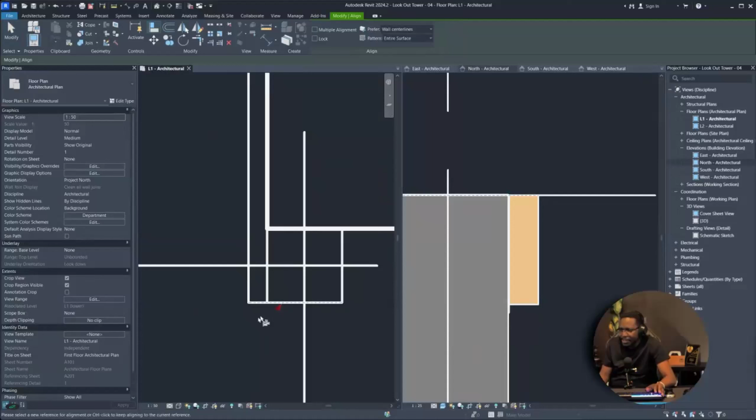Yeah, so this is this element here that we're looking on right here. So let's also align it to this view. So I'm going to choose align. There we go. And right now this beam is here, and this is our slab that is here. All right. So the slab should actually be sitting on top.

Now there's a couple ways we can do this. We could have another level and call this level under slab. I think I'm going to go with that level. So I'm going to say level 1 lower under slab. So I'm going to copy this level and I'm going to make it 2 inches. Maybe. There we go. And this is going to get a little confusing.

So what I want to do is I want to move the title, which I can do, or I can just actually break. Okay, I'm going to move this down just one. Right. So I'm looking for this break line here. And now I can kind of break away the heading so that it's not so confusing. Kind of like that. So now for this one, where is that dimension? Here we go. I want to make it 2 inches below. Now I can break this away like this, so it's a little easier to read.

Now what I want to do is let my beam be attached to this level, which is under floor slab. So I'm going to call this L1 lower under floor slab. Yeah, I know it's a mouthful, but we got to keep organized with our levels. That's the beauty of Revit. It can really allow us to be organized. So what we're going to say is that we want the reference level. Right now the reference level of this is here.

Now, the interesting thing about the structural system is that when you click on it and look in the properties, notice it says that the reference level is level 1. But when you click on a floor slab, notice it says the constraints is level 1. So constraints is different from reference levels. So notice that you can't readily edit the reference level here. And that's just how structural members usually operate.

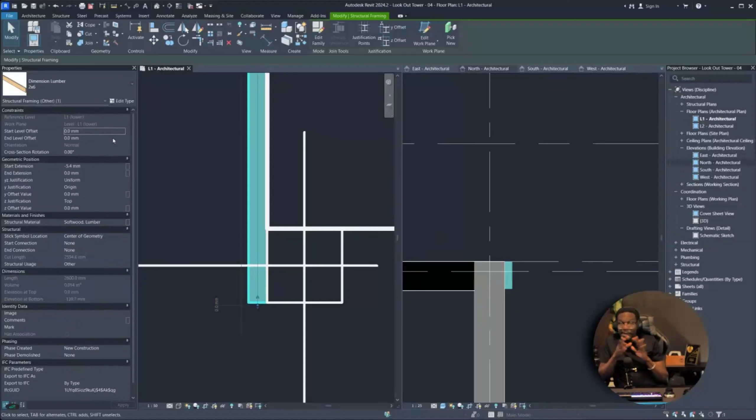They are very rigid in how you edit them because they need to be, because they are literally the structure of the building. So they're not easily manipulated unless you really want to manipulate them. And additionally, I think it's set up this way because it's perhaps easier to work between industries like architecture, engineering, structural design. I think it's easier for them to manipulate the model when they're collaborating when it's set up this way.

So anyway, to change the level, remember what we want to do. We actually want to place this structural member here on this level, right? Because we want it to be below the floor slab. So in order to do that, we need to click on the structural member, and in order to edit the reference level, we need to look under Modify, right here, and go to Edit Work Plane. And notice right now it's referencing lower level, so we need to reference level 1 under floor slab. Choose OK, and now it's moved down to that level.

Then for our floor slab here, the level is on level 1 lower, but we need to actually set the height of this, because right now it's measuring 150, but we need it to measure 2 inches. And we need it to be timber preferably. So in order to do that, we're going to have to go to Edit Type, and what we can actually do is choose a floor that is close to what we want.

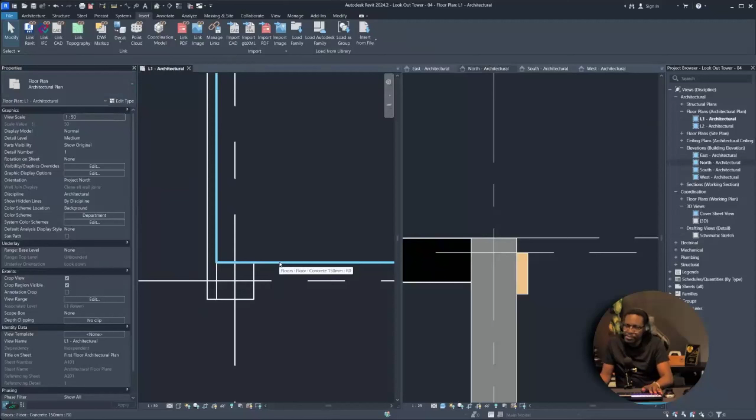So let's see if we have anything here. We don't really have wood flooring. We could try to import it. Right, but what we're actually going to do is we're just going to change this from a floor. We're just going to choose a wood finish. Now, notice when you choose that, you're not going to see any difference in your drawing. Remember, this is a system family, so pretty much it changes the setting.

Now here is the finish level here, and it is 20 millimeters thick. And it has the material. This is the material, but you only see the material when you change it to texture. So for this type of flooring, we just want to show the top level, right? Whereas this material, the way that this is set up, it just represents the floor as a single slab, but defines how that slab is made up.

Now you will see how that slab is made up, maybe when you cut a section, but you're not going to visually see it on the drawing. So this is one of those areas where we would choose a level of detail. Now in our case, we want to actually show the covering on the top of the floor. So we're actually going to delete these other elements here, and we're only going to leave the finish.

We could move this level down, and this level we will delete. So we're just going to leave the finish level, and we're going to make it be 2 inches. We're going to let it be 2 inches, and that's it. I'm going to choose OK. So that's it. And this is for floor finish 2 inches. Choose OK. All right. And there we go.

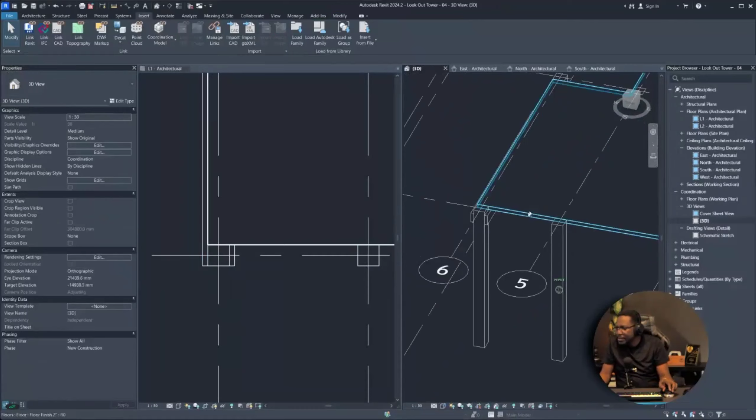Now we have the floor finish, and we have it in 2 inches, which is right in this level here, which is great because now we can copy this. So CO to copy, and we're going to stick it right here. Oops. So now we have this arrangement, and you can look at this in, let's open, there we go. So we can see this is our arrangement there, which is good. So now we have these structural members going across like that.

Now there is still one thing missing because we actually have members going down this way that are sitting on top of these members. So actually I'm going to go back to structure and go to structural beam, and I'm going to draw another member going like this. Now this member that we drew, which is this member here, we're going to align this. Let's go to edit work plane, and this one should actually be under floor slab.

Then we're going to need another level. Yes, another level. And let's go to the side view for this one. So ideally we would want a level that is under floor joist. Let's call it that. So we're going to click this level here, and we're going to copy it. Yeah, there's a lot of levels here. All right, so this level, we're going to do the break thing again. And the reason the break thing didn't save is because we're in a different elevation view. So you have to do this for every view.

There we go. So this one we're going to call L1 lower under floor joist. So this one is going to be under the floor joist. So now if we go to 3D view, we want these two members here to reference the layer that's under floor joist. So now let's see, yes, under floor joist.

Right, so I think we made an error there. So it should be under floor joist, which is FJ. Right, so choose OK. So now they're under here, which is exactly what we need. We need this to be under here, and we need the floor joist to be under here. So let's arrange this. We're going to use the align tool. The shortcut is AL, and we're going to align this like that. As a matter of fact, let's just drag this down like this. Actually, let's use the align tool, align this there.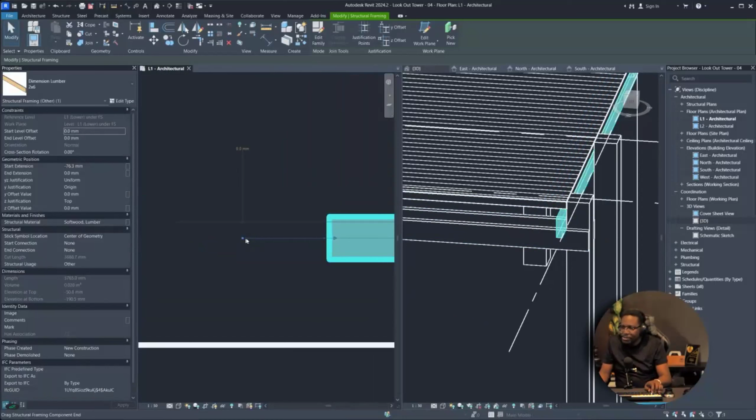And that's the thing with the structural tool, you can actually move the member along the structural grid line, or you can manipulate the actual structural grid line. All right, so let's move the actual structural grid line. So I'm going to go to move. There we go. I'm going to move it down to here. Oops, is it there? There we go. Now it's there. All right. So that is what we are looking for there.

So now that we have one corner pretty much done, we can just duplicate this to the other areas. And we can use a combination of our plan view along with the other views. So this area here, there should be some stairs that go here. But before we put the stairs in, we're going to adjust this.

So we're going to make the structural lines, let's use the plan view. Let's grab the structural lines. We're going to let the structural lines be actually out here, but we can extend the member beyond the structural line. So usually you want the structural lines to snap to the structural grid, like this. And then the structural member, you can make it whatever length. So for example, I'm going to snap this member to this edge here.

And now we're going to duplicate this. So this is actually on both sides. So we're going to copy this over here. Okay, we're going to save. So I'm going to save progressively again.

Now a key note on saving, Revit actually auto saves. If you notice here, you see I have some saves with some numbers. So for example, when I saved as 4, Revit auto saved one called 4001, 4002, but I still like to save progressively, so that I can track my steps.

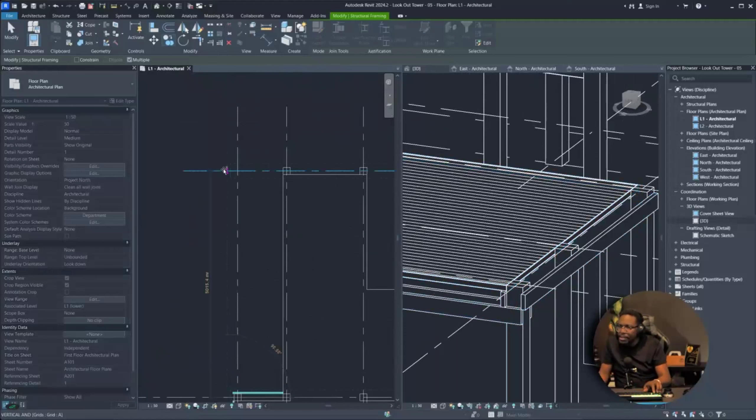So let's copy these. So we're going to go to CO. We're going to copy it in the plan view. So we'll put one there and then one here. And for these, we're going to delete the end ones because we don't need them. There we go. And for these, we're going to extend them all the way to the end here. And same thing for this one. You can see that it's actually below the floor level. All right, there we go.

So when you look in the 3D view, you can actually see those structural members going beyond that. So these are like the primary floor joists, and then you would have more members traveling along here, but we're going to put the primary members first. Now you can also do this in the 3D view, where it's a little bit harder. Let's do it in the plan.

So we're going to choose this and extend this to the full length. Remember, this is the structural grid we're extending first. So we extend it all the way to the grid, this one as well. And then we can change the member. So for example, this is below, right? So we have this member going all the way across here, but it would actually stop here.

So this is where we can use the align tool. We can use it in the 3D view as well. Align that and align that. So if you click on it, you still see that the grid comes all the way, but the member aligns down there. There we go. And I think we can do the same thing here, where we can align the member to be along there. I think we needed a grid in the middle. It just seems to be more structurally sound because this span is looking a little big.

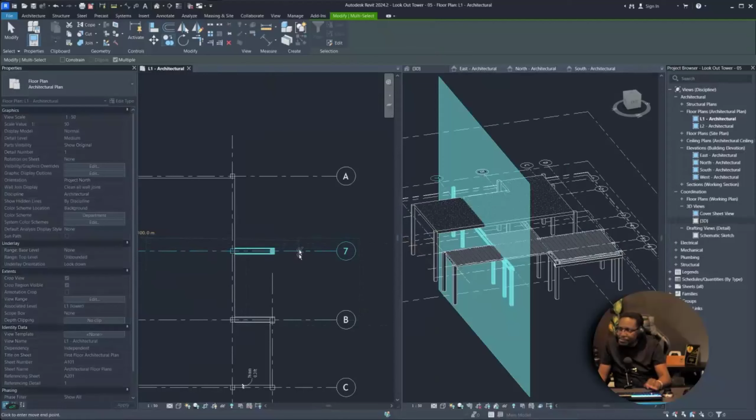So I'm just going to select the entire middle, including the grid, and copy it somewhere here. And this is where we can now deal with the spacing. So maybe this member needs to be in the middle of these two spaces here. A good way to make sure this is in the middle, you can use your dimension tool and dimension this side, then also dimension that side. Actually, wait, let's go again.

Use the dimension tool and dimension from here to here to here, and then we can just click this equal, and it will make it in the middle. It didn't carry these members with us, so we're going to have to move this. There we go. Now we know this is equal, with equal sides, so now we have a middle structural member, which seems a little bit more reasonable structurally.

Now we do need to copy this column within this space here. I'm going to use the word structurally reasonable to describe putting these columns here, so now we have a member here, here, here. Now we also need to do the same thing with these levels.

Let's go to this elevation again. We need to also have a level 1 upper under, level 1 upper under floor joist, and level 1 upper under. Oh man, this is getting crazy. We're going to copy this, and copy it 2 inches, and yeah, we need to totally organize this because it's getting a little crazy.

So this one here is the level 1 upper, which we already knew. This one here is going to be the level 1 upper under floor slab. Are you following? I hope you guys are following. It's about to get interesting now.

Some people like to draw with a lot of levels, and some just like to set the offsets manually. But the best practice is to use levels for everything, because if you decide the level 1 upper needs to be higher, then everything attached to that level will move automatically, right, all the floor joists, everything. So you want to have as many levels as possible.

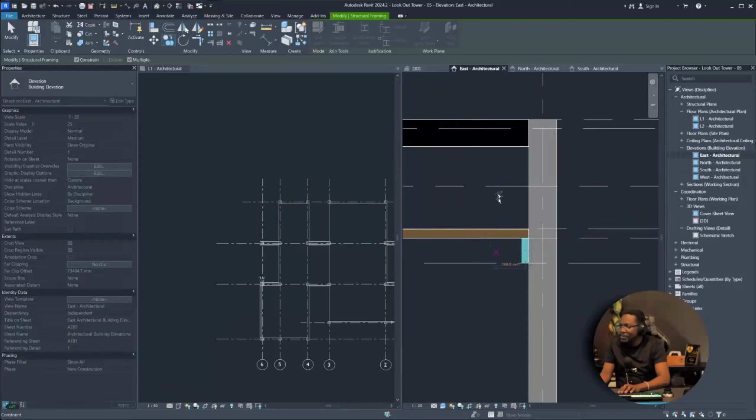Definitely, it doesn't hurt. We're going to copy this again, and this one was actually the length of the structural member, so I'm going to copy this structural member. Now if I try to copy this structural member up here, it's not going to work, because for structural members you have to set the working plane.

So I'm going to set this to the upper under floor slab, up here, and of course I'm going to set this floor slab again. I'm going to change this to the one we made, which was floor finish 2 inches, like that. So now this is under that, and then this will be under here. Let's align that with the other levels, and let's also make this a little bit more neat.

There we go. So this is now, okay, wait for it guys, this is going to be interesting: level 1 upper under floor joist. Yeah, so now this is under here. So now we have this structural member. I'm going to align it from here to here, and this member here, let's look at that in 3D. Okay, so it's here, so that's perfectly fine.

So all we need to do is adjust the length of the element. Let's use the align tool, and alright, that looks okay. We do need to fix this, because these guys here would need to fall underneath, I think, or it could be that the floor is cut around these elements. We're not exactly sure yet, and we don't want to dive too much into these details.

So what we can do is a top offset of 2 inches, I mean negative 2 inches. There we go, same thing for this.

There we go. Now we also need a member running across here. Do we have any we could copy? No, we don't have any, so we need to draw one. So we're going to do that here in our floor slab.

Now this drawing might be getting a little confusing, so we can always go to shaded, and we'll see where the shaded areas are. So we need to go to structure, structural beam, and I'm just going to draw the beam in first. Oh wait, before I draw, I'm going to choose the reference level, so this level needs to be level 1 upper under floor slab, and draw it like that.

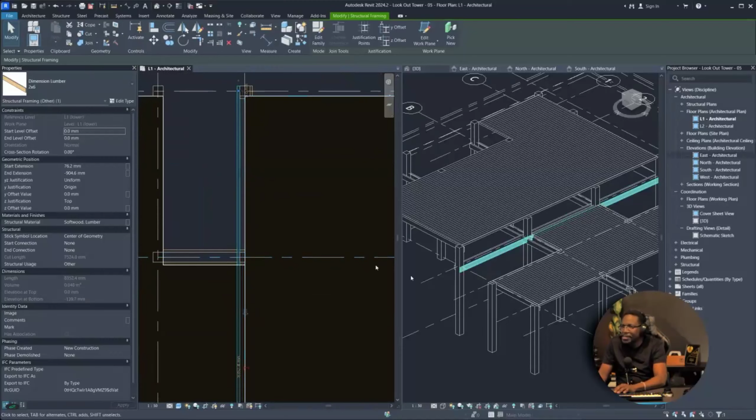And I don't think I need this element here. Wait a minute, this is lower, this needs to be higher. I thought I did set that.

So this needs to be upper under floor slab, and so does this guy here. I don't need this here, but before I delete it, I think I need to copy them. So I'm going to copy them, and I'm going to copy them here as well. But obviously these need to go down to this level because they are higher.

So I need to go to edit work plane, and I'm going to make this lower under floor slab. There we go. Then I'm going to copy them now.

There's one more. This one is tricky because it's here. Okay, let's put it here, and let's actually, I had this one already. Yes, I did. This might actually look interesting, having another column here. I'm not sure if it's structurally feasible. Looks a little bit overstructured, but it's okay. We're just doing a concept.

Our base is coming along. We do need to copy it here for this part. So there we go. And what we need to do is we need to delete this outer one, and then this one here, we're going to adjust it. Actually, I can just use the align tool.

Okay, coming along. So obviously these members here, they don't go all the way down here. They would stop here actually. So before I stop them there, I think I should copy them. I need one here as well. So I'm going to copy these. I think I can do this.

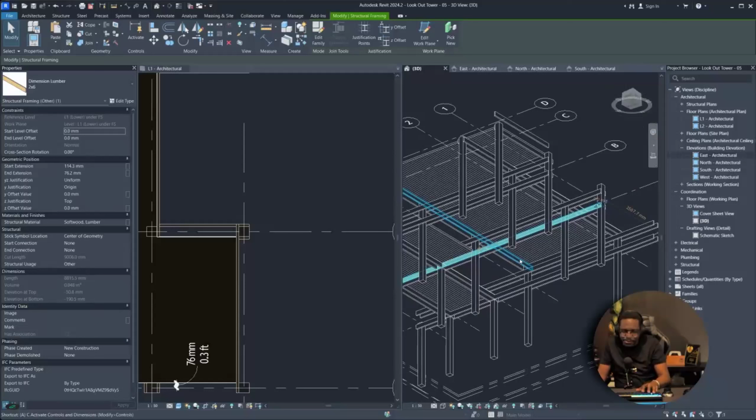Now, of course, we don't need all this structure here. So these ones here need to be aligned to the edge here. So I'm going to go to align. I think I'll do this in 3D view, it's easier. Same thing again for this guy, and this guy, and this guy, and this guy.

Maybe we should put another member here. I don't know, it might look nice. We don't have a budget for this project, so why not? Our only budget is time. So we're going to align this like that. All right, cool.

So this guy here is a little weird. Where are you? What are you doing? This needs to be on the upper under floor joist. No, actually, it should be upper under floor slab. Yeah, but of course it's inside. Oh, so we don't need that actually.

Right, so we do need one member going this way. We need to shorten these guys here. This one is done. Oops. Now we need to shorten these. So we don't need this member here.

Actually, I'm starting to believe we do need them and we should extend the slab out here. I'm thinking that makes more sense. So I'm going to go to edit boundary and make the boundary come all the way to here. And I'm going to do the same for this one, make the boundary come all the way there. And this one, let the boundary come.

Maybe. Actually, I'm going to leave that one. But this one, I'm definitely going to let the boundary come all the way there. And I'm going to choose. Okay, all right, so there we go. So this boundary comes all the way to the edge of that.

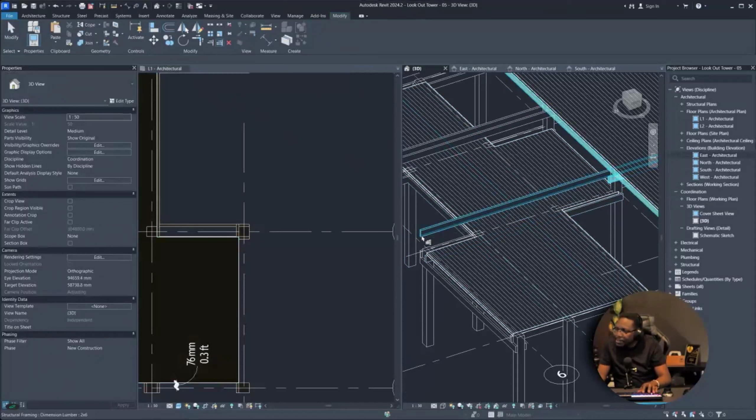Now these guys need to be adjusted. So we're going to align this. We can actually do align multiple. So we can do this one, so that way we can just click that, and then click that, and that, and that, and that.

Maybe this shouldn't be extending out like that. So let's do that again. Let's choose multiple alignment, I think that's what I was looking for. Yeah, there we go, all right. Okay, let us save again.

Okay, so I think we have most of what we need. I think this floor slab needs to come all the way to the edge, the line tool. Now we have some weird intersections here. So this guy here, we need to offset this and this. We need to do a top offset of negative 2 inches. So now it's below the floor.

So this one as well. Remember, if I need to select this and it's below, I can always use the tab key if I can't get it right, if I can't get to select it.

So top offset -2 inches. Same thing here. I forgot about these. All right, so I think we have our base pretty much done. This guy here, we could carry this in to here. Yeah, let's carry it inward to this face. There we go.

This floor slab here, we need to adjust it a little bit. So we're going to go to the edit boundary and we're going to align this here, but we're going to align this there and we're going to align this here. It's okay. I don't think we need this outer element here. Move that and remove that. It becomes a little weird when you remove it because they need to attach to these elements here. So I'm going to leave them just for now.

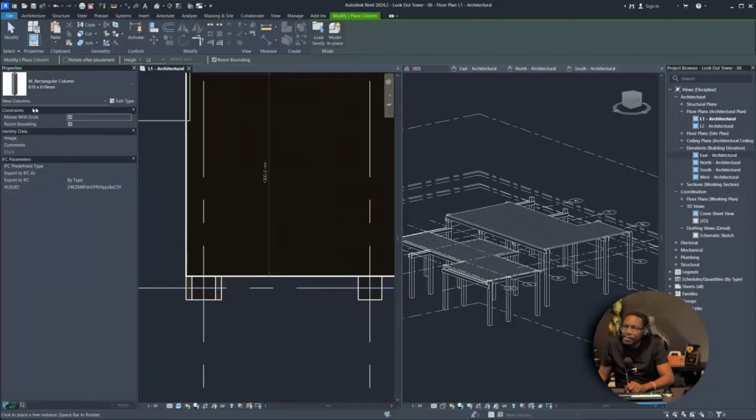Before we put it in, we are going to say we want the column to be on a specific level. Okay, let's put it in first like that. And then we click on this column. And then we want to say the top should be on top of foundation and the base should be on bottom of foundation. There we go. So this is where our base is.

All right, so now we just need to copy these everywhere. So I'm going to go CO copy and I'm going to grab this and I'm just going to stick this everywhere there is a column and it should be fine. I think there's a column here. Oops, we got an overlap. All right, now it doesn't matter that we have all of these here.

Oh wait, I think I left out one here. There should be one here as well. So I'm going to copy. This is going to be under the ground, so it doesn't really matter. But if we did decide that we wanted these column bases to be shorter, we could just adjust our level here. And we could go to like the elevation here and just adjust this. Like we could just drag it literally. Or go to the move tool and move it up like that. And then everything would adjust because we're using the levels.

So notice how, let's look at this view. Notice how we have a bunch of levels, but our main level is... I'm going to detach this so that we can see it. But here it's actually, yeah, these can be tricky sometimes. They're actually changing the level. Let's not change it. Okay, because what happened is that you can actually change this value different from the distance of the level. So we want to change the distance like that. And this one, level 2, oops, we want to unlock it and then change the distance there. So these are our main levels. This one, level 2, which is associated with this plan, and this one, level 1 lower, which is associated with that plan. Everything else here are just reference levels, basically.

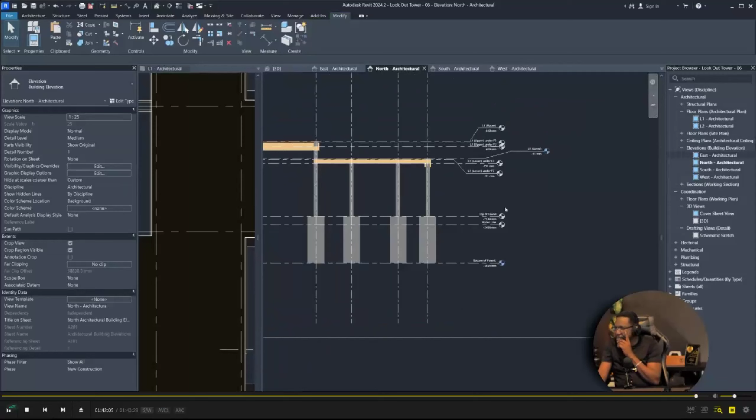So they are just there to give us an idea, just to provide a reference so it can make our modeling a lot easier. Oh wait, we do actually have to copy these. We have them here already, right? Oh, there's none here. All right.

And we can look at that in 3D, right? So these are these members that run across. And these members should actually be lower. Oh, I see what's happening here. Okay, let's undo that. We already have these members already. Yeah, we don't need this. These members that run across should be our structural joist, not our floor joist.

Right, so these should be the ones that actually extend to here. So we're going to do align, multiple. Yeah, so this, that, again, that, and that, this, and that. Yeah, we do need one more here. So let's copy it using this. We need one here, we need one here. So copy, right, because that's going to be below. All right, oh wait, we don't need one here. Oh yeah, we don't need one here. There's no column there, right. And this one here should be there.

All right, and with that, I believe we have our base now modeled structurally. Okay, now...